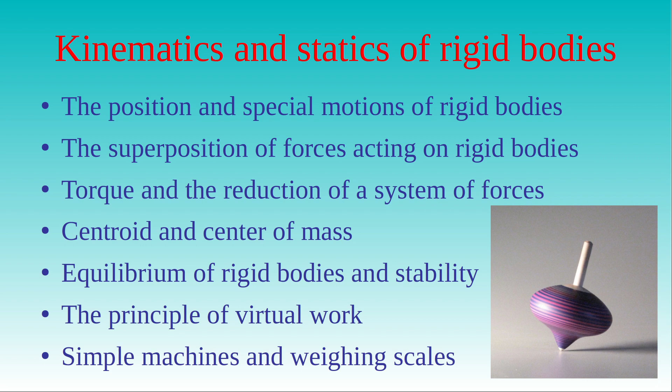We introduce the principle of virtual work as well and reformulate the criterion of equilibrium for rigid bodies with the help of this principle. Finally, we present simple machines and weighing scales operating on the principles related to the criterion of equilibrium for rigid bodies.

In order to start with the procedure to determine the position of a rigid body, we recall the concept of rigid body. When we presented the models used to describe bodies in mechanics, we defined rigid body as an idealized model where the points of the body cannot change their position with respect to each other.

The position of a body is always determined with respect to a frame of reference, for example the laboratory where we perform experiments with the body, and we describe its position in a coordinate system attached to the frame of reference. The position of a rigid body is completely determined in three-dimensional space by specifying the positions of three arbitrary points A, B, and C of the body,

provided they are not collinear, that is, these points are not lying on the same straight line.

For if we fix only the point A of the body, then the points B and C can be rotated over the spheres of radii given by the distances of the points B and C from the point A, with the center at the point A.

If the point B of the body is also fixed, then the point C can still be rotated about the axis passing through the points A and B.

If we fix the three points A, B, and C of the body, then we fix the position of the whole body, that is, we completely specify its position in space.

Since we use three non-collinear points and the position of a point is described by three coordinates in a coordinate system, we need 3 times 3, that is 9 data, to determine the position of a rigid body in the coordinate system attached to the frame of reference.

If we use a Cartesian coordinate system, then these data consist of the Cartesian coordinates x, y, and z of the points A, B and C.

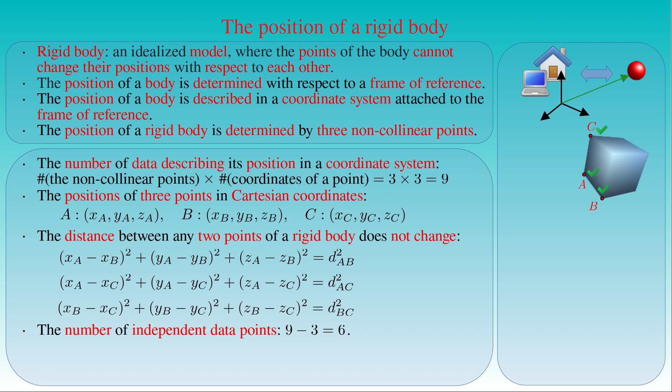Therefore, the instantaneous position of a rigid body performing an arbitrary motion is determined by 6 independent data. In other words, a freely moving rigid body has 6 degrees of freedom as opposed to a freely moving point mass, which has only 3 degrees of freedom.

We can choose the 3 coordinates of an arbitrary point of the body and 3 angles describing its orientation to specify the 6 independent data for a rigid body, where the angles are the so-called Euler angles.

In order to describe the position of a rigid body in the coordinate system with coordinates x, y, z and origin O, we attach another Cartesian coordinate system with coordinates x', y', z' and origin O' to the body. If the position and orientation of this coordinate system is known, then the position of the body is specified. Its position is given by the coordinates x null, y null and z null of the point O' in the coordinate system x, y, z.

We need 3 other data to determine the relative orientation of the two coordinate systems. The positions of the origins O and O' are indifferent, so we can translate the coordinate system x, y, z from point O to point O' without changing its orientation. Then the relative orientation of the two coordinate systems is determined as follows.

First we rotate the coordinate system counterclockwise about its z-axis by the angle psi. Then we rotate it counterclockwise about its x-axis by the angle theta. In the last step, we rotate it counterclockwise about its z'-axis by the angle phi, such that the y and z axes are brought into the y' and z' axes.

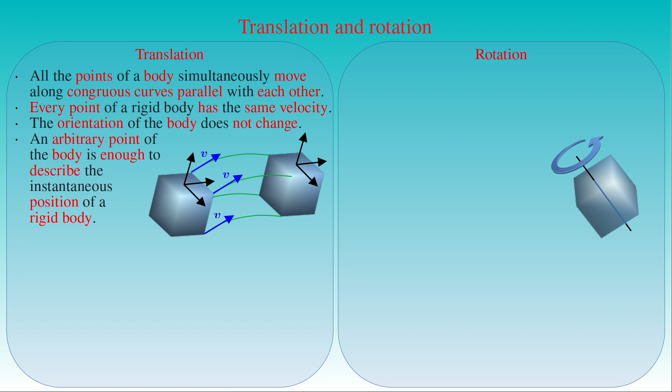Another important type of motion of a rigid body is rotation about an axis. When a rigid body rotates, its points lying on the rotation axis remain at rest, whereas the rest of its points move along arcs lying in planes perpendicular to the axis. In this case, we need not only an arbitrary point of the rigid body but also the orientation of a coordinate system attached to the body to describe its instantaneous position.

Now we can assume that the general motion of a rigid body is a composition of a series of infinitesimal translations and rotations of the body. We will illustrate this statement with a simple example.

Let the 3 points specifying the position of a rigid body be the 3 corner points A1, B1, and C1 of an equilateral triangle at the instant of time t1, and let this triangle have another position with corners at points A2, B2, and C2 at the instant of time t2. Here the letter D denotes the length of the sides of the equilateral triangle.

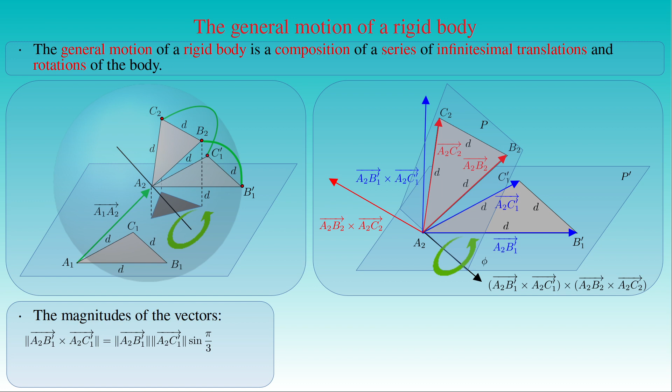Since the length of the sides of the triangle is given by d, the magnitude of the cross product equals d squared times the square root of 3 over 2. The magnitude of the cross product of the vectors pointing from corner A2 to the corners B2 and C2 is also given by d squared times the square root of 3 over 2, because the triangles are congruous.

This result helps us determine the rotation angle if we calculate the dot product of the normal vectors of the planes P and P', which can be written as the product of the magnitudes of the two normals times the cosine of the angle phi measured between them. By substituting the magnitudes of the two vectors into this equation, we obtain 3 over 4 times d to the 4th, times cosine phi. For given triangles, the coordinates of the points A2, B'1, C'1, B2 and C2 are known.

Then the cross product of the plane's normals can be computed from the coordinates of the points. Similarly, the scalar product of the plane's normals is determined by these coordinates. Since the length d is fixed for the triangles, we can express the cosine of the rotation angle as a function of the coordinates. We can also translate the triangle A1B1C1 along the vector pointing from point B1 to point B2.

This brings it to the position described by the triangle A'1B2C'1. Then we need to rotate the latter triangle about an axis passing through point B2 to bring it to the position of the triangle A2B2C2.

Although the translation vectors are different and the rotation axis passes through different corners of the triangles in the two cases, both axes have the same direction and both rotation angles are the same.

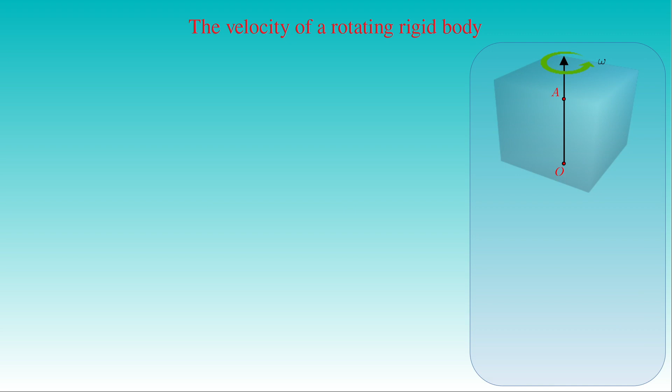After having defined the angular velocity of a rotating rigid body, we show how to interpret this kinematic quantity as a vector. Let us consider a rigid body rotating about a fixed axis passing through the points O and A with angular velocity omega. An arbitrary point P of the rotating body, described by the position vector r, has a circular trajectory around the axis, and we can apply the formula obtained for circular motion, stating that the magnitude of the velocity v of point P is given by its distance ρ from the axis, times the angular velocity omega.

If the angle between the rotation axis and the position vector r is denoted by theta, then the distance ρ can be written as the length of the vector r times sine theta, and the speed of the point P is equal to omega times r times sine theta. The right-hand side of this equation reminds us of the magnitude of the cross product of two vectors, given by the product of their magnitudes times the sine of the angle between them. As a result, we can consider the angular velocity omega as a vector lying on the rotation axis, with its tail at the point O and with an orientation determined by the right-hand rule.

By applying the notations of the figure, we can write this vector as omega times a unit vector pointing upward, where the unit vector is expressed as the vector pointing from point O to point A divided by its length. If we hold the axis with our right hand and rotate the fingers in the direction of motion of the rotating body, then our thumb points the direction of the angular velocity.

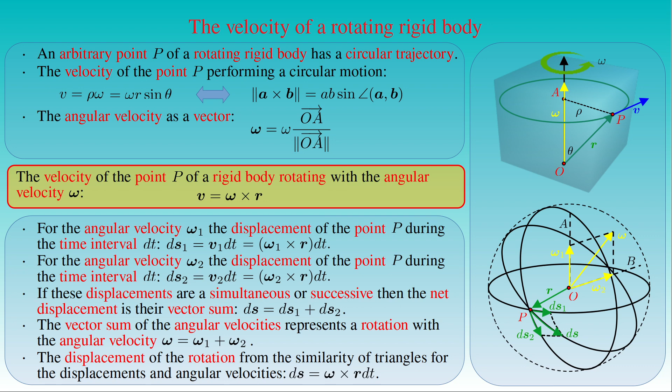We can go even further in the interpretation of a rotation as a vector. Since the angular velocity omega of an infinitesimal rotation is a vector, its product with the infinitesimal interval of time dt is also a vector, and it can be interpreted as the infinitesimal rotation vector d phi.

The infinitesimal change dr in the position vector r of a given point P of the rotating body is always perpendicular to both the axis of rotation, that is the vector d phi, and the instantaneous position vector r. As a result, the infinitesimal displacement of point P can be written as the cross product of the infinitesimal rotation vector d phi and the position vector r.

However, small but finite rotations cannot be considered as vectors because the parallelogram rule does not hold for them and the finite rotations are not commutative.

For example, let us consider a cuboid in a Cartesian coordinate system. We can rotate the cuboid first about the x-axis by 90 degrees, and then about the y-axis by 90 degrees. But we can change the order of rotations and rotate it first about the y-axis by 90 degrees, and then about the x-axis by 90 degrees. As a result, the cuboid has different positions and orientations after the composition of rotations in the two cases.

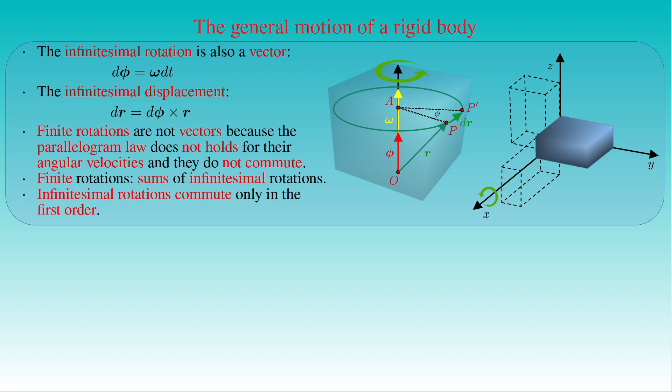If any finite rotation can be constructed by the sum of infinitesimal rotations, how can finite rotations be non-commutative and the infinitesimal ones not? In fact, infinitesimal rotations commute only in the first order, as we approximated the infinitesimal displacements along the circular path of the rotation with displacement vectors in the first order.

If we study the general motion of a rigid body, we can choose the reference point O attached to the frame of reference and another reference point O' attached to the moving body given by the instantaneous translation vector R0. Then any point P of the body can be described by the position vector R pointing from point O to point P, and the relative position vector R minus R0 pointing from point O' to point P.

We already saw that the instantaneous velocity v of an arbitrary point P of a rigid body performing a general motion can be combined from the translation and the rotation about the axis passing through the point O'. The translation velocity v0 of the body is given by the derivative of the translation vector R0 with respect to the time t. The origin O' was chosen such that the instantaneous axis of rotation with the angular velocity omega passes through it. Then the velocity v of the point P is given by its translation velocity v0, plus the cross product of the angular velocity omega of the rotation and the relative position vector R minus R0.

Now we present the special cases of rigid body motion in terms of kinematics based on the degrees of freedom of the moving body. In the beginning of the study on the kinematics of rigid bodies, we introduced the degrees of freedom of their motion as the number of independent variables that determine the instantaneous position of a rigid body in space. Based on this concept, we can divide rigid motion into two general groups.

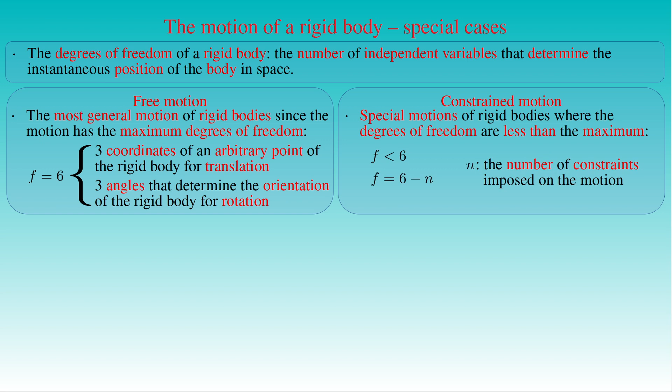We already studied constrained motion in the case of a point mass, and this concept can also be applied for a rigid body, where constraints are imposed either on its motion or its position, or on both, limiting its motion and position. For the rigid motion described in a coordinate system, constraints are given by the equations of geometric elements representing some restriction in the motion of the body. Such geometric elements can be some set of fixed points of the rigid body, curves, or surfaces.

For example, a set of fixed points can determine one or more fixed points of a body or even a rotation axis passing through the body, along which the points of the body do not change their position during its rotation. Similarly, if a ball is attached to a string and whirled in a circle by hand, then the motion of the ball is constrained such that the curve describing its trajectory in space is a circle. In the third example, the ball rolls on a curved surface of a ramp preventing it from free fall, and the surface represents a constraint on the motion of the ball.

These examples demonstrate that the points of the rigid bodies have no instantaneous displacements perpendicular to the curve or the surface representing the constraint. The ball whirled in a circle has no motion in the radial direction of its circular path, and the ball rolling on the curved surface had no instantaneous displacement in the direction of the surface normal.

We can talk about several types of the constrained motion of rigid bodies depending on the number of constraints imposed on the motion. The first type of constrained motion is the motion of a rigid body on a surface, for example the motion of a wheel or a ball across a floor or a table. Here the degrees of freedom f of the moving body is equal to 5 since the translation perpendicular to the surface is forbidden during the motion. Such a motion has different cases.

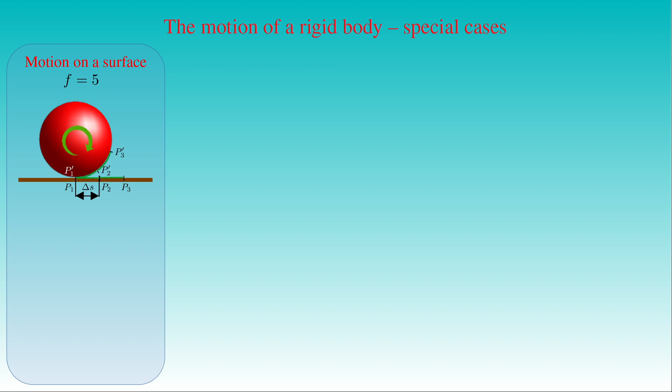If we mark the instantaneous contact points of a moving ball across a table on both the ball and the surface of the table at given intervals of time, then the curve connected with the points P1, P2, P3 etc. on the surface, and the curve connected with the points P1', P2', P3' etc. on the ball can describe the motion of the center of the ball. If the arc lengths delta s measured between the corresponding adjacent points of the two curves are equal, that is the length of the section P1 P2 is equal to the length of the arc P1' P2', the length of the section P2 P3 is equal to the length of the arc P2' P3', and so on, then the ball rolls on the planar surface like a billiard ball moving across the table when it is hit with a cue stick.

Otherwise we talk about rolling-sliding motion instead of pure rolling, which can also be demonstrated with a billiard ball hit below its center. The ball performs pure sliding if the locations of points P1, P2, P3, etc. on the ball remain the same, as in the case of a bumper ball which can also slide across ice.

If the position of the contact point remains the same on both the rigid body and the surface, and the body rotates about an axis perpendicular to the surface and passing through the contact point, then the motion is called spinning or drilling. As an example, we can consider a marble spinning on a surface, or a more illustrative one of a basketball spinning on one finger.

Another type of constrained motion is called spherical motion, where the rigid body is fixed at a point O such that it can rotate about this point, while any other point P of the body can move over a spherical surface with center O.

This type of motion can be considered as a series of infinitesimal rotations about instantaneous axes of rotation passing through the point O. As a result, the motion has only 3 rotational degrees of freedom, given either by the Euler angles, or more generally by 2 angles describing the direction of the instantaneous rotation axis and a third angle measuring the rotation of the body about this axis.

A typical example of spherical motion is the swinging of a spherical pendulum, where the deepest points of the tracks drawn in the sand by the tip of the moving bob have a constant distance from the suspension point O of the pendulum, that is, they run over a sphere with center O.

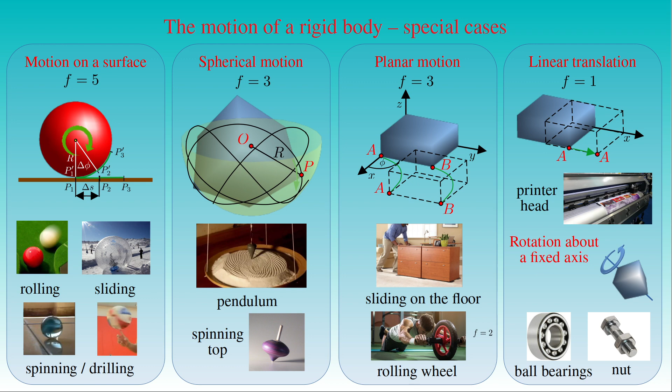In the discussion on rigid body kinematics, we demonstrated that the motion of a rigid body can be interpreted as a composition of translations and rotations. Now we examine how to describe these two types of special motions in coordinate representation.

As already seen, we talk about translation if all the points of a rigid body simultaneously move along congruous curves parallel with each other. These curves are arbitrary curves in space, but in the case of linear translation they consist of straight line segments.

Linear translation is an important special case since it is often used to study the relations between different frames of reference. The distance and the direction of a translation are determined by the length and the direction of the translation vector. If an arbitrary point P of a rigid body is described by the position vector r with respect to some reference point O, then the position vector r' of the point P after the translation of the body is given by the vector sum of the position vector r and the translation vector delta r.

In order to give the coordinate representation of translation, we can attach the origin of a Cartesian coordinate system to the reference point O and describe the position vectors r and r' with its x, y, and z components. Similarly, the Cartesian components of the translation vector can be written as delta x, delta y and delta z.

These coordinates represent the three translation degrees of freedom of rigid bodies translated in space, and we can consider translation as a point transformation of three parameters.

Then the vector equation of translation represented in Cartesian coordinates states that the components x', y', and z' describing the position of the point P after translation are equal to the coordinates x, y, and z of the vector r describing its original position, plus the coordinates delta x, delta y, and delta z of the translation vector.

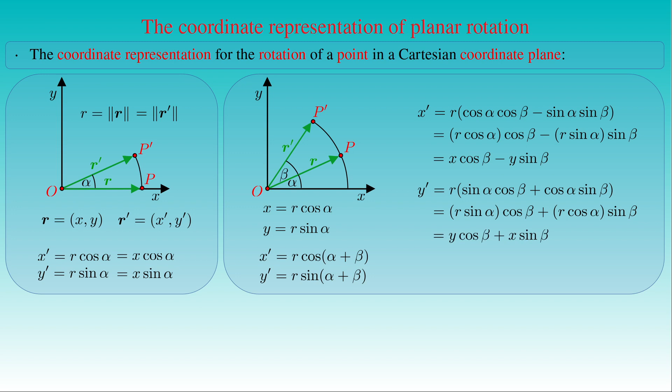As a result, the coordinates x' and y' of the point P' rotated about the origin through the angle beta in the xy plane are given by the following equations. X' is equal to the x-coordinate of the point in its initial position times the cosine of the rotation angle beta, minus the y-coordinate of the point in its initial position times sine beta. y' is given by the y-coordinate times the cosine of the angle beta, plus the x-coordinate times the sine of the angle beta. We can also write these two equations in vector notation.

The column vector on the left-hand side describes the coordinates of the point P', and the right-hand side is the product of a 2 times 2 matrix and the column vector describing the coordinates of the point P. Here the matrix with the elements cosine beta, minus sine beta, sine beta and cosine beta is the coordinate representation of the rotation of a point about the origin O through the angle beta in the xy plane, which is also called the rotation matrix of the planar rotation.

We can generalize planar rotations about the origin of a Cartesian coordinate system to spatial rotations about one of the coordinate axes, and determine their coordinate representation by using the one derived for planar rotations. The straightforward generalization of the rotation of a point in the xy plane is the rotation of the point P about the z-axis in a plane parallel with the xy plane. The distance of the plane of rotation from the xy plane is given by the coordinate z at the point O, where the z-axis passes through the plane of rotation.

The coordinates of the position vector pointing from the point O to the point P are the coordinates x, y and z, where the coordinates of the position vector r' pointing from the point O to the point P' are described by the primed Cartesian coordinates. Here the angle alpha is measured between the xz plane and the position vector r, and beta is the angle of rotation measured between the position vectors r and r'.

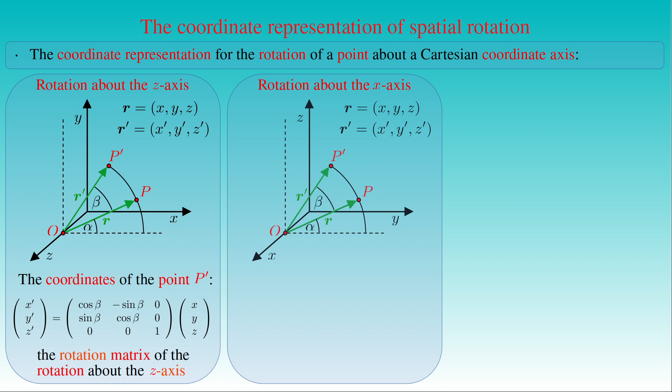For rotations about the x-axis we can choose any plane of rotation parallel with the yz plane. Here the plane of rotation passes through the x-axis at the point O, and the position vectors r and r', pointing from O to the points P and P', are parallel with the yz plane. The coordinates x', y', z' of point P' are expressed as the product of a 3 times 3 matrix and the column vector of the coordinates x, y, z.

The matrix of the planar rotation in the yz plane forms the second and third rows and columns of the matrix, where the first row and column are constructed such that the multiplication gives the primed coordinates where x' is equal to x. This matrix is the rotation matrix for the rotation of a point about the x-axis through the angle beta.

Similarly, we can determine the coordinate representation of rotations about the y-axis by choosing any plane of rotation parallel with the zx plane. In this case the plane of rotation passes through the y-axis at the point O, and the position vectors r and r', pointing from O to the points P and P', are parallel with the zx plane. The column vector of coordinates of point P' is given by the product of a 3 times 3 matrix and the column vector of coordinates of point P.

Here the second row and column of the matrix vanish except the diagonal element, which is 1. The rest of the elements in the corners of the matrix are constructed from the matrix of the planar rotation in the zx plane through the angle beta. Since the direction of rotation is opposite to that of the first two cases, the rotation angle beta has a negative sign, which changes the sign of sine beta since it is an odd function. The resulting 3 times 3 matrix is the rotation matrix for rotation about the y-axis through the angle beta.

Then we have 3 matrices providing the coordinate representation of spatial rotations about the 3 Cartesian coordinate axes. The matrix R(x-hat, alpha) represents the rotation of an arbitrary point about the x-axis through the angle alpha, where the bold-faced x-hat denotes the unit vector pointing from the origin in the direction of the x-axis. Similarly, the matrices R(y-hat, alpha) and R(z-hat, alpha) represent the rotations about the y and z axes respectively, where y-hat and z-hat are unit vectors pointing in the direction of the y and z axes, and alpha is the angle of rotation.

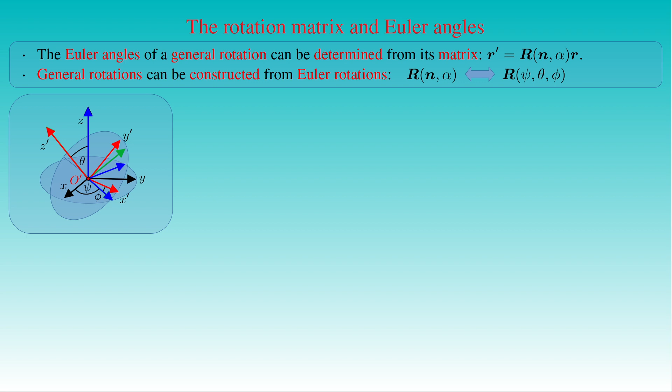Since the Euler rotation is the composition of the three rotations of the Cartesian coordinate axes, the rotation matrix R expressed in terms of the Euler angles psi, theta, and phi can be written as the product of the rotation matrices R z-hat-prime phi, R x-hat theta, and R z-hat psi.

In order to compute the product of the three matrices, we start with the multiplication of the second and the third matrices in the product. We write the elements of the third matrix, that is the matrix R z-hat psi, in a table, and the elements of the second matrix, that is the matrix R x-hat, in another table such that their mutual positions determine the result of their multiplication.

This arrangement facilitates the computation of any element in a given row and a given column of the product matrix, obtained from the dot product of the corresponding row of the second matrix and the corresponding column of the third matrix. The product of the first row of the second matrix and the first column of the third matrix gives the top left element of the resulting matrix, which is equal to cosine psi.

The product of the first row of the second matrix and the second column of the third matrix is equal to minus sine psi for the top middle element of the resulting matrix. The product of the first row of the second matrix and the third column of the third matrix gives the vanishing top right element of the resulting matrix.

Similarly, the product of the second row of the second matrix and the first column of the third matrix gives the middle left element of the resulting matrix, which is equal to cosine theta times sine psi. The product of the second row of the second matrix and the second column of the third matrix is equal to cosine theta times cosine psi for the element in the center of the resulting matrix.

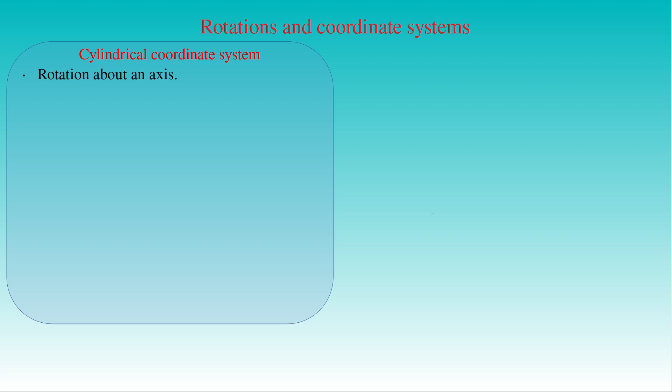We can study the motion of a rotating rigid body in a cylindrical coordinate system if the body rotates about a fixed axis. Any two fixed points of a rigid body determine an axis about which the body can rotate, for example a bicycle wheel attached to its axle.

In other cases, rigid bodies can rotate over some constrained surface, like a toy train moving on a circular track, or a ball bearing where one of the races is fixed while the other one is allowed to rotate by the separated balls between the races.

The description of such a motion becomes very simple in a cylindrical coordinate system with its origin on the axis, while its z-axis points in the direction of the rotation axis of the body. Any point P of the rotating body can be described by the position vector r with the coordinates rho, phi and z.

Since the coordinate ρ is the distance of the point from the axis of rotation, it is invariant under the rotation of the body. Similarly, the points of the body do not move along the z-axis, and the z-coordinate of their rotating position vector remains constant. If r' denotes the position vector of the point P' after rotation, the components ρ', phi' and z' of r' are equal to ρ, phi plus delta phi, and z respectively. Here delta phi gives the change in the azimuthal angle of the rotating point.

As a result, the azimuthal angle completely describes the motion of the rigid body during its rotation, which simplifies the analysis of the problem. A spherical coordinate system can be used to describe rotating motion as well.

If we fix only one point of the rigid body, then it can rotate about the fixed point in an arbitrary direction. As a result, all the points of the body rotate over spheres of radii given by the distances of the points from the fixed point, that is from the center of rotation. Typical examples of such spherical rotation are a spinning top with its tip constrained to a cup while its top end slowly revolves about the tip, and a spherical pendulum swinging on the surface of a sphere.

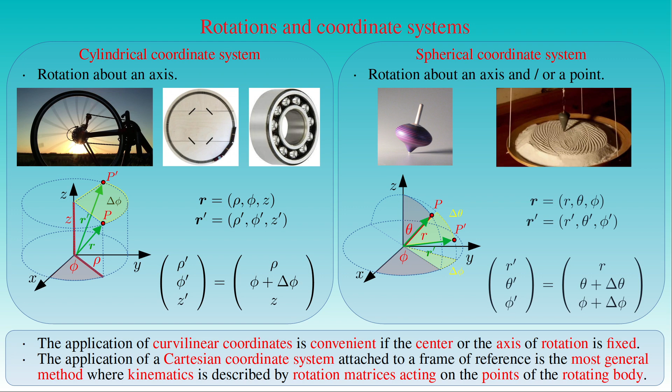In the context of the coordinate representation of rotations, we need to mention another type of point transformation: reflection. At first sight, reflections of geometric points in space do not seem to have anything to do with the physical motion of rigid bodies, but this geometric transformation has an important role in the classification of rotations.

When we talk about the reflection of a rigid body in space, we imagine an arbitrary plane in the vicinity of the body serving as a plane of reflection. The image of the body appears on the opposite side of the plane, and it has the same distance from the plane of reflection as the rigid body.

If the images of the points A, B, C and D of the body are denoted by the primed letters, then the distance d sub AO is equal to the distance d sub A'O. That is, the intersection point O of the section AA' and the plane of reflection is the midpoint of the section AA'. Similar equations can also be given for the points B, C, D and for other arbitrary points of the rigid body with the corresponding points of intersection.

We can also see that although the shape of the image remains congruent to the original, it has a reverse orientation. That is, the image flips left to right: if the original points A and B are in the front, then the reflected points A' and B' are in the front as well.

We can obtain the coordinate representation of the reflection if we attach a Cartesian coordinate system to the plane of reflection such that one of its coordinate planes, for example the YZ plane, is in the plane of reflection.

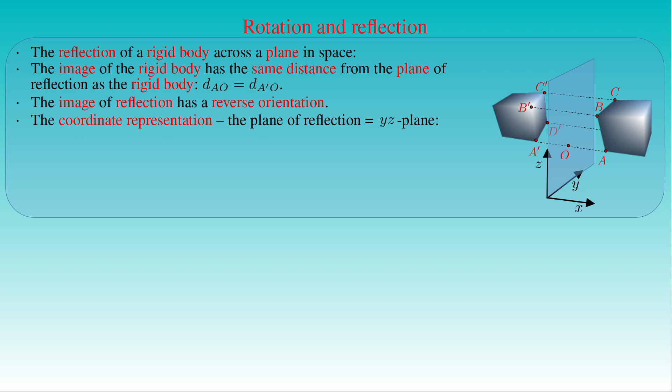If any point of the rigid body has the x, y and z coordinates in this coordinate system and its image has the primed Cartesian coordinates, then the distance equation of the original points and their images has the coordinate representation stating that the coordinates x', y' and z' of the image are equal to -x, y and z, respectively.

The right-hand side can be written as the product of a 3x3 diagonal matrix and the column vector x, y and z, where the non-zero components in the diagonal are -1, 1 and 1. This matrix is the coordinate representation of the reflection across the YZ coordinate plane, and it is denoted by P sub x hat, where the unit vector x hat is the normal to the plane of reflection.

We can derive the reflection matrices for the other two coordinate planes as well, where all the Cartesian reflection matrices P sub x hat, P sub y hat and P sub z hat are diagonal matrices, with the diagonals 1, -1, 1 for P sub y hat, and 1, 1, -1 for P sub z hat.

If the normal to the plane of reflection has an arbitrary direction, we can rotate the plane together with the body into any of the coordinate planes, perform the reflection of the body, and apply an inverse rotation on the image. We have already shown that rotations can be represented by orthogonal matrices, which are denoted by the capital letter O.

In other words, the square of the determinant of a general rotation matrix is equal to 1. As a result, the determinant is equal to either +1 or -1. If the determinant of a matrix is equal to 1, we call it a special orthogonal matrix, denoted by the capital letters SO, and such matrices represent the proper rotations of rigid bodies in space.

If the determinant of a matrix is equal to -1, then it can be written as the product of a special orthogonal matrix and a reflection matrix. In other words, it is a composition of a proper rotation and a reflection in space. Such operations are also known as improper rotations.

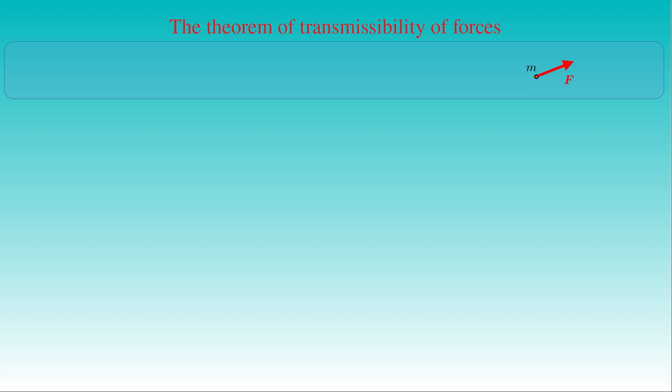In the case of a rigid body, this information is not unique due to the size and extension of the body. In order to give a complete description of the effect changing its state of motion, we need to specify both the point P of the application of the force F, that is the point of the body where the force is applied, and the line of action of the force, that is the line along which the force acts.

A system of forces simultaneously acting on a point mass can be replaced with the vector sum of the system. If the net force given by the vector sum is zero, that is the forces acting on the point mass are balanced, then they do not have an effect on the state of motion of the point mass.

In the case of rigid bodies, which are not point-like objects, the superposition and the balance of forces are more complicated problems, since the points of application of the individual forces are generally different. For example, let us place a board on 3 balls of the same size such that the balls rolling on the floor allow the board to move horizontally.

If a pair of forces F and minus F, that is 2 forces of the same magnitude but opposite in direction, are applied on the board at points P1 and P2, then the board either rotates about some vertical axis even if the net force acting on it vanishes, or stays at rest.

The result is due to the fact that the lines of action of the forces are different in the first case and coincident in the second. The findings can be formulated as follows: a rigid body under the influence of a pair of forces with the same magnitude but opposite direction is in equilibrium if the lines of action of the forces are coincident. Then the pair of forces has no net effect on the body.

Suppose the force F is applied on the body at point P1. We can also apply the pair of forces F and minus F at any point P2 on the line of action of the force F exerted at point P1. Based on our statement, the force F applied at P1 and the force minus F applied at P2 do not have any net effect on the body, and they can be neglected.

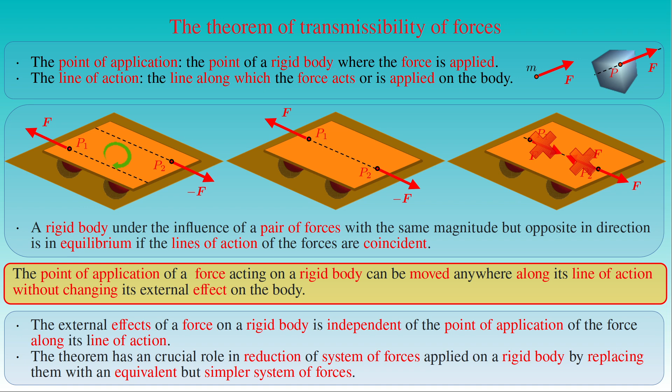First, we consider the superposition of non-parallel planar forces, that is, forces with intersecting lines of action lying in one plane. Suppose P1 and P2 are the points of application of the forces F1 and F2 acting on a rigid body. We translate the forces F1 and F2 to the point of intersection A of their lines of action, and determine their net force F by using the parallelogram law. Obviously, the point of application of the force F is arbitrary along its line of action.

We can repeat the same procedure for the force reduction if we add another force to the system of forces acting on the rigid body.

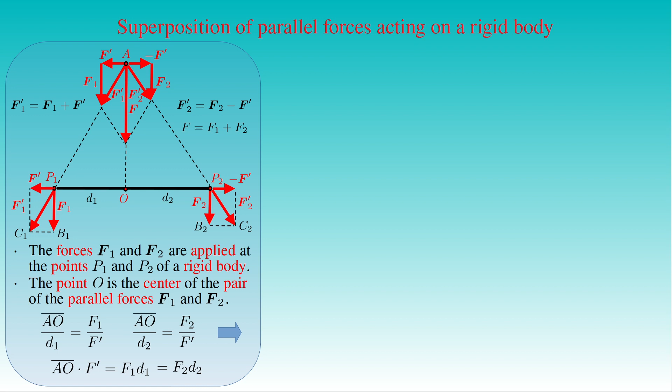We can generalize this result by translating one of the points of application of the forces F1 and F2, and conclude that the parallel forces F1 and F2 of the same orientation, applied at the points P1 and P2 of a rigid body, can be replaced by a net force F, which is parallel with the given forces and its magnitude is equal to the sum of the magnitudes of these forces.

The line of action of the force F is determined by the position of the point O, where the length L1 of the section P1O divided by the length L2 of the section P2O is equal to the distance d1 over the distance d2. These two ratios are equal to the magnitude of the force F2 over the magnitude of the force F1, which can be written as the equation stating that F1 times d1 is equal to F2 times d2.

The whole system is in balance if we suspend a weight G from the rod at the point O, where the magnitude of the weight G is given by the sum of the magnitudes of the forces F1 and F2. The forces F1 and F2 can therefore be replaced by the force F applied at the point O.

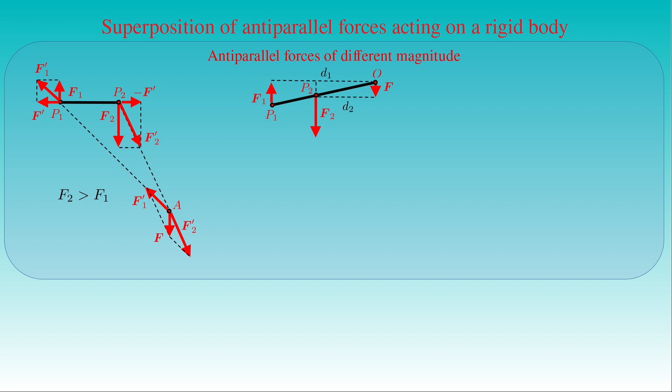As in the previous example, we can translate the force F along its line of action and conclude that the magnitude of the net force F of the forces F1 and F2 is given by the difference between their magnitudes, and its line of action is determined by the equation stating that the magnitude of the force F1 times the horizontal distance d1 between the point P1 and the point O, is equal to the magnitude of the force F2 times the horizontal distance d2 between the point P2 and the point O.

The force F replacing the antiparallel forces F1 and F2 points in the same direction as the force F2, since the force F2 has greater magnitude than the force F1, and the point P2 is located between the points P1 and O. In order to demonstrate this result, we can apply the same apparatus as used in the previous problem.

The rope on the right-hand side exerts the force F1 upon the rod at the point P1, which is still one of the antiparallel forces, whereas the weight G acting on the point O represents the other one of the antiparallel forces. The net force of the antiparallel forces is a force that has the magnitude G minus the magnitude of F1, and it is applied at the point P2 and points downward, cancelling the force F2.

The equation stating that the magnitude of F2 is equal to the magnitude of G minus the magnitude of F1 has the following numerical form: 2 units of weight is equal to 5 units of weight minus 3 units of weight.

For the equation stating that F1 times D1 is equal to F2 times D2, we can write that 3 units of weight times 10 units of length is equal to 5 units of weight times 6 units of length.

Now we consider antiparallel forces of the same magnitude. If the lines of action of the forces are not coincident, then we cannot use the procedure presented here, because the lines of action constructed by applying the auxiliary forces have no intersection.

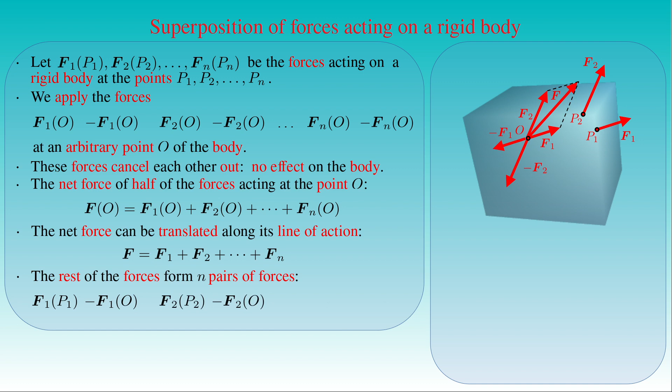Then we determine the net force Fo of the forces F1O, F2O, ellipsis, FnO, which is applied at the point O. The net force F can be translated along its line of action and we write it without specifying the point of application. The rest of the forces forms the pairs of forces F1P1 minus F1O, F2P2 minus F2O, ellipsis, FnPn minus FnO.

As a result, we replace the system of forces acting on the body with a single force and n pairs of forces. This procedure does not simplify the system of forces applied on a rigid body, but we will prove that the pairs of forces acting on the body can be reduced to a single pair of forces, and in turn, a general system of forces can be reduced to a single force and a single pair of forces.

Now we introduce a new quantity called torque acting on a rigid body about an axis. Let us consider a rigid body rotating about a fixed axis as seen in the figure. For a vertical axis of rotation, we can neglect the effects of the weight of the body on its motion.

As everyday experience shows, we can change the state of motion of such a body, for example when we open or close a door, by applying a force on it provided the line of action of the force is not parallel with the axis of rotation.

In other words, if an arbitrary force F' is exerted upon a rigid body rotating about a fixed axis, only its component F lying in the plane perpendicular to the axis of rotation can have an effect on the rotation of the body. Then we can examine a force F acting on a body with the line of action in the plane perpendicular to the axis of rotation passing through the plane at the point O.

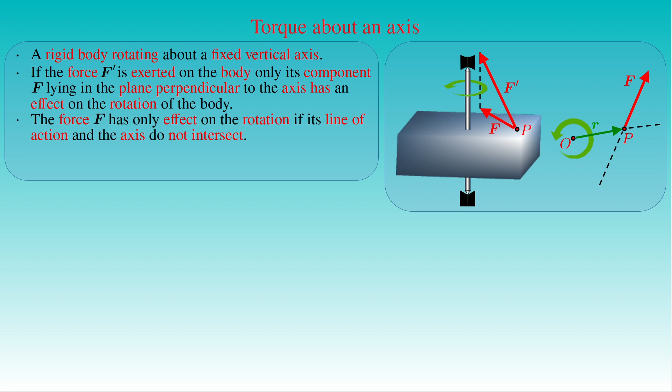Everyday experience also shows that the force F can only have an effect on the rigid rotation if its line of action and the axis of rotation do not intersect, that is the distance d between the point O and the line of action of the force does not vanish.

The perpendicular distance d from the axis to the line of action of the force F is called the lever arm of the force F about the axis of rotation.

We define the torque tau of the force F acting in the plane perpendicular to the axis of rotation by the magnitude of the force F times the lever arm d of the force. By convention, counterclockwise torques are positive and clockwise torques are negative.

The unit of torque is given by the unit of force times the unit of length, which is the same as the unit of work, that is the unit of mass m times the unit of length L times the unit of time t to the minus 2, times the unit of length L. The SI unit of torque is therefore equal to Newton meter.

If the force F is applied at angles below the critical angle, then the spool will roll towards the person pulling the thread. If the force F is applied at angles above the critical angle, then the spool will roll away from the person pulling the thread.

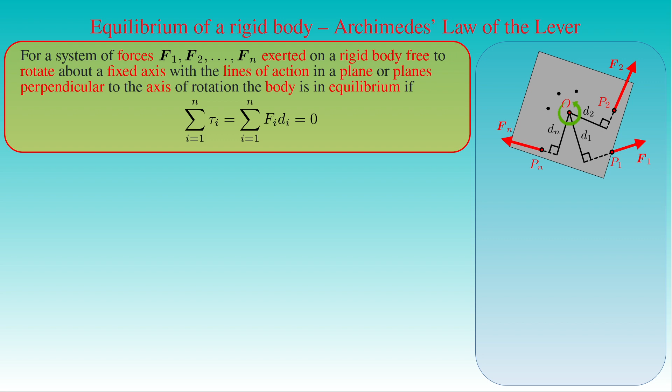In the figure, point O denotes the intersection of the axis and the plane or planes of the lines of action, and D1, D2, ..., Dn are the lever arms of the corresponding forces about the axis of rotation. The rigid body under the influence of these forces is in equilibrium if the algebraic sum of the torques τ1, τ2, ..., τn of the forces F1, F2, ..., Fn about the rotation axis vanishes. Each torque τ is given by the magnitude of the force Fi times the lever arm di of the force Fi. Archimedes' law of the lever is just a special case of this condition for n equal to 2,

stating that the weights suspended from a lever are in balance at distances inversely proportional to their magnitudes. If the force F1 represents the weight suspended from the left arm of the lever at distance d1 measured from the pivot of the lever, or its fulcrum, and F2 is the weight suspended from the right arm of the lever at distance d2 from the fulcrum, then we can write that the magnitude of force F1 times the lever arm d1, minus the magnitude of force F2 times the lever arm d2, vanishes. The second term in the sum is negative since the force F2 produces a clockwise torque on the lever.

This formula is equivalent to the equation stating that F1 times d1 is equal to F2 times d2, which can be demonstrated with the setup shown in the figure. That is, 2 units of weight times 6 units of length is equal to 3 units of weight times 4 units of length.

This law immediately follows from the result already obtained in the discussion on the superposition of forces acting on rigid bodies, because the forces F1 and F2 can be replaced by the force F with a line of action passing through point O. Since its line of action has an intersection with the axis of rotation, the net force F cannot produce rotation.

Another important application of the concept of torque is related to the work done in the case of rigid rotation. If a rigid body turns through a small angle δφ about the axis passing through point O under the influence of force F applied on the body at point P, then point P has a small displacement δs given by r times δφ, where r is the distance between points O and P.

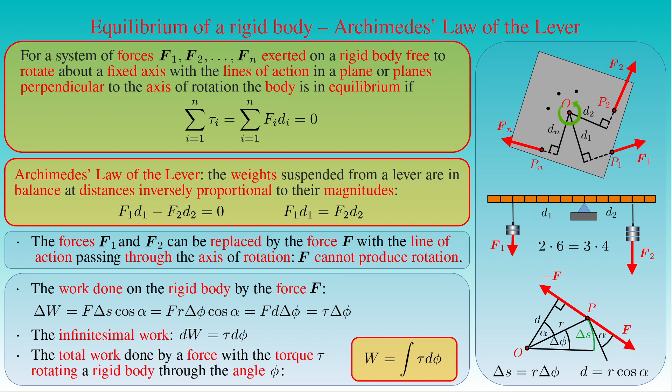Now we generalize the concept of torque about a point and interpret it as a vector quantity. Let us suppose that a rigid body is free to rotate about the point O, and the force F is applied on the body at the point P.

If theta denotes the angle between the direction of the position vector r of the point P with respect to the point O and the line of action of the force F, then the lever arm d of the force F about the point O can be written as the length of the position vector r times sine theta.

By definition, the torque tau of the force F about the instantaneous axis of rotation passing through the point O is given by the magnitude of the force F times the lever arm d of the force, which is equal to r times F times sine theta.

If we interpret the right-hand side as the magnitude of a cross product, namely the cross product of the position vector r and the force F, then we can generalize the concept of torque as follows.

The torque tau of the force F applied at the point P about the point O is defined by the cross product of the position vector r of the point P with respect to the point O and the force F. Since the cross product of two vectors also gives a vector, torque is defined as a vector.

Its direction is perpendicular to the plane spanned by the vectors r and F, and its orientation is determined by the right-hand rule. The unit of torque is the unit of length times the unit of force, as stated in the definition of the scalar-valued torque.

That is the unit of mass m times the unit of length L times the unit of time t to minus 2, times the unit of length L, which has the SI unit of Newton meter.

We can attach a Cartesian coordinate system to the center of rotation O where the instantaneous axis of rotation is the z-axis. Then we can write the x component of the torque tau about the center of rotation as the y coordinate of the point of application P times the z component of the force F applied at the point P, minus the z coordinate of the point P times the y component of the force F.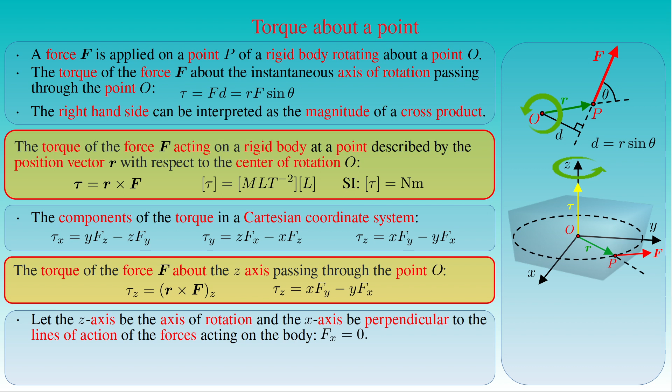For the z-axis as the axis of rotation and the x-axis perpendicular to the line of action of the force, the x component of the force F vanishes. As a result, the formula describing the z component of the torque reduces to the product of the x coordinate of the point of application P and the y component of the force F.

For example, let us apply the forces F1 and F2 at the points P1 and P2 such that their lines of action are perpendicular to the x-axis. Then the z component of the torque tau1 of the force F1 is given by the coordinate x1 of the point P1 times the y component of the force F1.

Since x1 is equal to minus the lever arm d1, and F1 sub y is equal to minus the magnitude of F1, we obtain F1 times d1, which is positive, indicating a counterclockwise rotation.

The z component of the torque tau2 of the force F2 is given by the coordinate x2 of the point P2 times the y component of the force F2. Here x2 is equal to the lever arm d2, and F2 sub y is equal to minus the magnitude of the force F2.

Tau z can be written as minus F2 times d2, which is negative, indicating a clockwise rotation. We also note that neither the z component of the force, nor the z coordinate of the point of application, appear in the expression describing the z component of the torque tau. This involves the fact that neither the component of a force parallel with the axis of rotation, nor the coordinate of the point of application specifying its position along the axis, have a role in the rotation about the axis.

By applying the general definition of torque, we can formulate the condition of equilibrium for a rigid body free to rotate about a single fixed point.

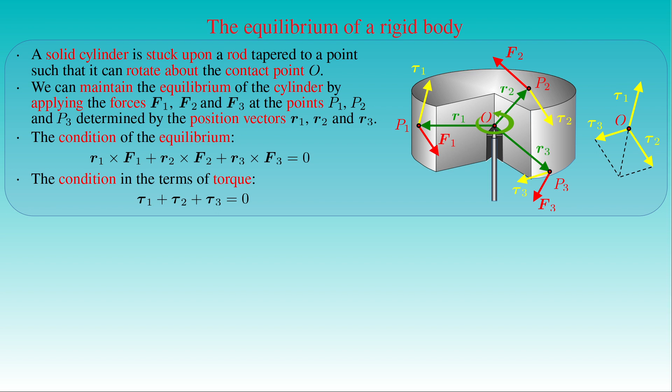The general formulation of this condition, which can also be demonstrated experimentally for a finite number of forces, is the following: for a system of forces F1, F2, ellipsis, Fn applied on a rigid body free to rotate about a pivot point O, the body is in equilibrium if the vector sum of the torques tau1, tau2, ellipsis, tau n about the pivot point O vanishes.

Here the torque tau i, for all i from 1 to n, is equal to the cross product of the position vector Ri of the point Pi with respect to the pivot point O, and the force Fi applied at the point Pi. In this condition, the reference point O is the pivot point, that is a fixed point of the rigid body around which the body is free to rotate.

However, we can also choose an arbitrary reference point O' in the body, and write the torque tau i in terms of the position vector R'i with respect to the new reference point, for all i from 1 to n. Then we can write the vector sum in the condition as the sum of the cross products of the position vectors R'i and the forces Fi from i equals 1 to n, where each vector R'i can be written as the vector sum of the vector R0 and the original position vector Ri.

Since the vector R0 does not depend on the index i, it can be factored out in the first sum. Then we obtain the cross product of the vector R0 and the net force F acting on the body, defined by the vector sum of the forces Fi for all i from 1 to n. This result shows that the net torque on a rigid body by a system of forces is independent of the reference point only if those forces result in zero net force.

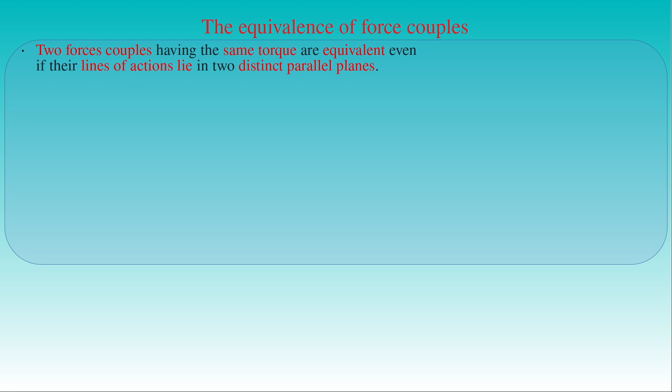As we can see, two sets of weights are used in the series of weights G1, G2 and G3: light ones and heavy ones. The light weights are only applied to achieve complete balance of the net forces exerted on the beam, and their contribution to the effect of the heavy weights is negligible.

In this setup, two force couples are exerted on the beam: the force couple F1 and -F1, and the force couple F2 and -F2. Since the beam is in equilibrium under the influence of the two force couples and the net force of the force couples vanishes, the net torque rotating the beam must vanish as well.

By definition, the torque τ1 is perpendicular to the plane P1 spanned by the force couple F1 and -F1, and its orientation is given by the right-hand rule, producing a clockwise rotation.

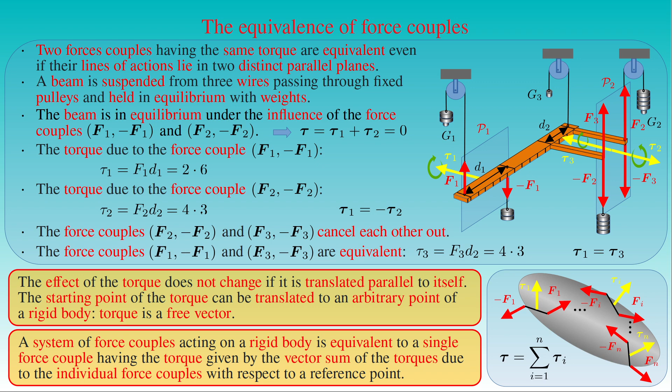We can apply this theorem to another one on the reduction of a general system of forces. When we studied the superposition of forces applied on a rigid body, we demonstrated that a system of n forces acting on the body can be replaced with a single resultant force and n pairs of forces, or force couples.

Now the theorem formulated here states that these n force couples Fi, applied at point Pi, and -Fi, applied at a reference point O, for i from 1 to n, are equivalent to a single force couple having the torque τ given by the vector sum of the torques of the individual force couples.

Then we can state the following theorem: the system of forces F1, F2, ellipsis, Fn acting on a rigid body is equivalent to the net resultant force F and a force couple producing the torque tau. Here the resultant force F is given by the vector sum of the forces Fi from i equals 1 to n, and it can be applied at an arbitrary point O of the body.

The torque tau due to the force couple is equal to the sum of the cross product of the vector Ri and the force Fi from i equals 1 to n. In the vector products, Ri is the position vector of the point of application Pi of the force Fi with respect to the point O.

We note that the resultant force F and the torque tau can be combined into a pair of vectors called a wrench, forming a six-dimensional vector used in screw theory, a mathematical formulation of forces and torques acting on rigid bodies. Then the theorem states that a system of forces acting on a rigid body can be replaced by a wrench.

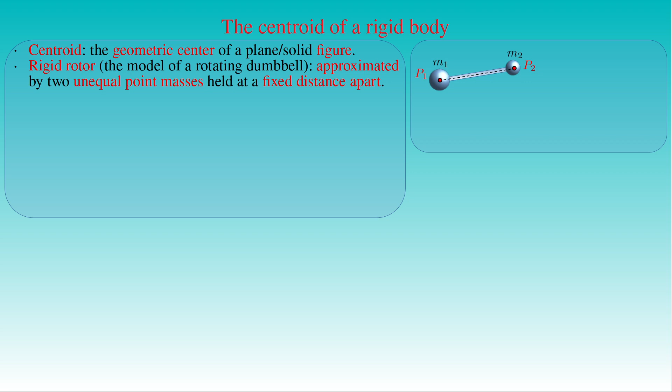First, let us consider the simplest idealized rigid system, the rigid rotor. It is the model of a rotating dumbbell that consists of two solid spheres connected with a rigid stick holding them a fixed distance apart. We approximate the spheres by the point masses m1 and m2 at their centers p1 and p2, and assume that the mass of the stick is negligible.

The gravitational forces acting on this system are given by the weights G1 and G2 of the two point masses, which are equal to the mass m1 times the gravitational acceleration g and the mass m2 times the acceleration vector g, respectively. The weights G1 and G2 point downward towards the center of Earth, but the lines of action of the two forces can be considered parallel over a short distance determined by the size of the rigid rotor.

We have already shown that these parallel planar forces can be replaced by their resultant force, capital G, that is the vector sum of G1 and G2, where the magnitude of capital G is equal to the sum of the masses m1 and m2 times the magnitude of the gravitational acceleration g.

We also saw that the line of action of the resultant force passing through the section P1 P2 at the point C is parallel with the lines of action of the two forces, and its distance from them is given by the equation stating that the ratio of the distance d1 between P1 and C to the distance d2 between P2 and C is equal to the ratio of the magnitudes of the two forces, that is the ratio of mass m2 to mass m1.

This relation can also be written as m1 times d1 equals m2 times d2. By applying the theorem of transmissibility, we can translate the point of application C of the resultant force along its line of action. In other words, the point of application can be any point along the line of action of the force G. However, if we rotate the body and change its orientation, the line of action of the force still passes through point C.

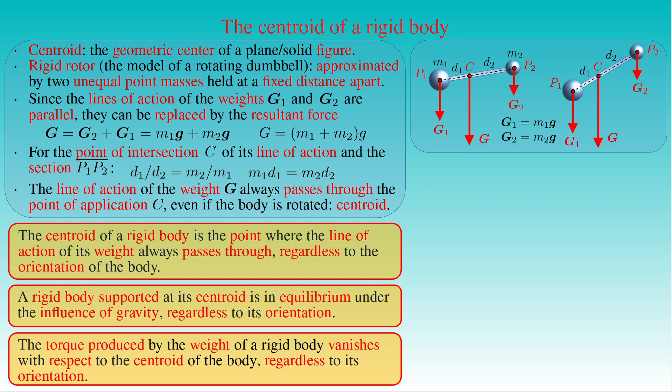In order to determine the centroid of a relatively small body, we can apply the method where we first suspend the body at a point P1 from a wire, then suspend it at another point P2. In both cases the body is in equilibrium, in which the vertical lines M1 and M2, called medians, passing through the point of suspension also pass through the centroid C of the body. Otherwise the torques produced by the weight G acting at point C with respect to P1 and P2 would not vanish, and the body would not be in equilibrium.

Then the centroid C of the body is the point of intersection of the medians M1 and M2, determined by suspending the body at its two different points P1 and P2.

In many cases we can determine the centroid of homogeneous bodies based on their symmetry properties. For example, in the case of a homogeneous thin rod, disk, annulus in a plane, or torus in space, sphere or cylinder, the centroid is the geometric center of the body. As the example of the annulus or torus shows, the centroid of the body is not necessarily located in the body. Generally, if a homogeneous body is symmetric about a plane, a line, or a point, then the centroid is in the symmetry plane, on the symmetry line, or at the symmetry point.

If the body has more than one symmetry plane or symmetry line, then the centroid lies on the line of intersection of these planes or at the point of intersection of these lines. For example, the centroid of a homogeneous triangle is the point of intersection of its three medians, connecting the vertices of the triangle to the midpoints of the opposite sides.

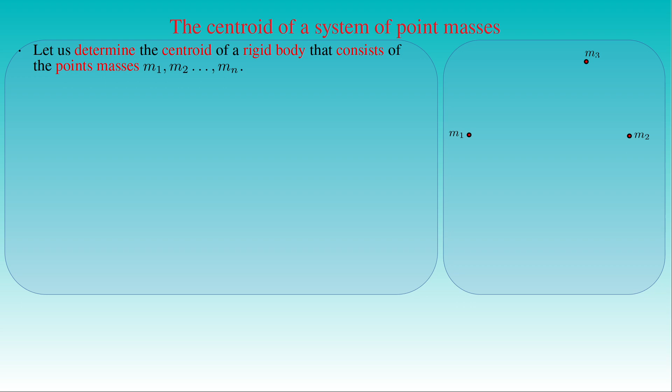We saw that the method used to determine the centroid of a rigid rotor can also be applied in the case of solid bodies. Now we generalize this method for rigid bodies of whatever shape, with no symmetry at all. Let us consider a rigid body that consists of point masses m1, m2, ellipsis, mn. For simplicity, we show only the first three point masses in this system and omit the rigid sticks holding them fixed distances apart. We can construct the centroid of this rigid system of point masses by repeating the method applied for the rigid rotor.

First we determine the centroid C sub 1,2 of the point masses m1 and m2, then we combine these point masses into the point mass m1 plus m2 at their centroid.

The position of the point C sub 1,2, lying on the line section connecting the point masses m1 and m2, is determined by the equation stating that the mass m1 times the distance d1 between the point mass m1 and the centroid

is equal to the mass m2 times the distance d2 between the point mass m2 and the centroid. In the second step we determine the centroid C sub 1,2,3 of the combined point mass and the point mass m3, and we combine them into the point mass m1 plus m2 plus m3 at the centroid C sub 1,2,3.

Then the equation determining the position of the centroid on the line section connecting the combined point mass m1 plus m2 at the point C sub 1,2 and the point mass m3 is the following.

The sum of the masses m1 and m2 times the distance d sub 1,2 between the point C sub 1,2 and the point C sub 1,2,3, is equal to the mass m3 times the distance d3 between the point mass m3 and the centroid C sub 1,2,3. We can continue this procedure for the rest of the rigid system of point masses, and determine the centroid of the whole system.

For a given reference point O, the set of position vectors R1, R2, ellipsis, Rn describe the positions of the point masses in the system.

Let R sub 1,2 denote the position vector of the centroid C sub 1,2, where the lengths of the vectors R sub 1,2 minus R1 and R2 minus R sub 1,2 give the distances d1 and d2 respectively.

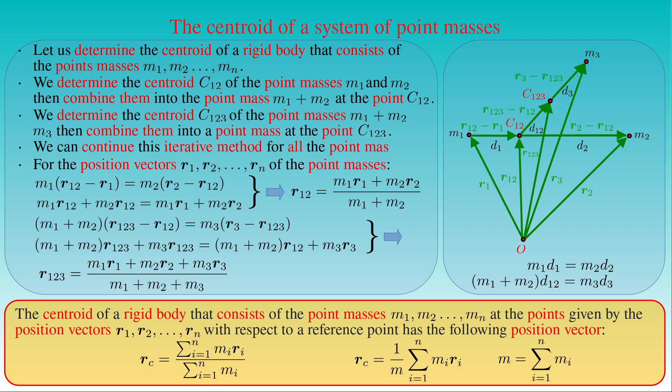In order to provide a quantitative description of the position of the centroid of a system of point masses, we introduce a Cartesian coordinate system having its origin at the reference point O, and represent the position vector Ri of any point mass mi by the Cartesian coordinates xi, yi, and zi. The coordinate expansion of the vector equation describing the position vector Rc of the centroid C gives three component equations. The x-coordinate of the centroid equals 1 over the total mass m of the system, times the sum of mi times xi from i equals 1 to n. We have similar equations for the y and z components of the centroid as well.

The vector and component equations define the centroid of a system of point masses even if the point masses have no rigid connections with each other. Although the three component equations of the centroid depend on the coordinates of the point masses, it is evident from the iterative construction method, without using any reference point and coordinate system, that the position of the centroid of the system with respect to the system itself is independent of the choice of coordinate system.

The position of the centroid of a system of point masses or a rigid body is completely determined by the distribution of mass in the system or over the volume of the body. In the general case when the distribution of mass is arbitrary, we call the centroid the center of mass of a system of point masses or a rigid body. The centroid is equivalent to the geometric center of a body, whereas its center of mass is defined by the equations obtained for the position vector Rc and its coordinates.

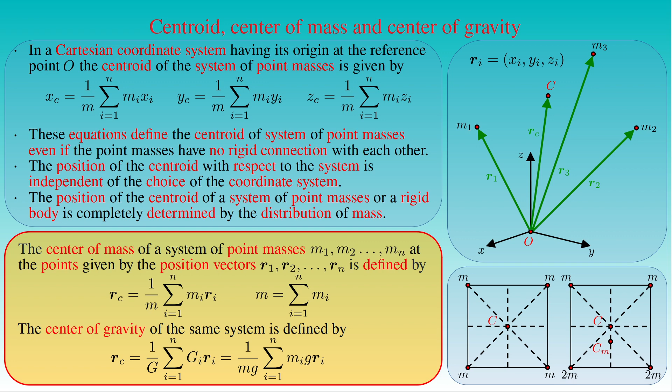As opposed to a system of individual point masses, ordinary bodies have a continuous distribution of mass which can be either homogeneous or inhomogeneous. In order to determine the center of mass Cm of a rigid body, we break up the body into n volume elements delta Vi, where Ri denotes the position vector of the volume element delta Vi with respect to a reference point O. The mass element delta Mi is equal to the mass of the matter in the volume element of the body with a continuous distribution of mass.

Then we can apply the formula derived for a system of point masses and approximate the center of mass Rc of the body with the sum of the position vector Ri times the mass delta Mi, from i equals 1 to n, divided by the sum of delta Mi from i equals 1 to n.

Since the density ρI of the matter in volume element ΔVi is given by the ratio of ΔMi to ΔVi, we can express ΔMi as the product of ρI and ΔVi. The center of mass Rc of the body can therefore be approximated with the sum of ρI times Ri times ΔVi from I equals 1 to n, divided by the sum of ρI times ΔVi from I equals 1 to n. If ΔVi tends to 0 while the number n of volume elements approaches infinity, the limit of each sum in the fraction gives a volume integral over the volume of the body.

As a result, the position vector Rc of the center of mass of a rigid body that has a density ρ depending on the position vector r is given by the volume integral of the density ρ times the position vector r, with respect to the reference point O, over the volume integral of the density ρ.

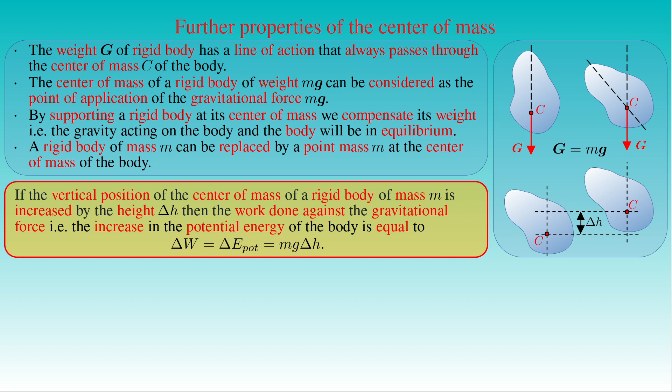If we suppose that the vertical position of the center of mass C of a rigid body is increased by the height delta h, we can express the work W done against the gravitational force, that is the increase in the potential energy of the body delta E_pot, as the mass m of the body times the magnitude of the gravitational acceleration times delta h.

We also saw that the torque due to the weight of a rigid body vanishes with respect to its centroid or center of mass and does not rotate the body. If the body is supported at its center of mass but is free to rotate, then we can determine the axis about which the rigid body will rotate under the influence of a force couple.

We already presented an experiment where a board is placed on 3 balls of the same size such that the balls rolling on the floor allow the board to move horizontally. If we apply the force couple F and minus F on the board at points P1 and P2, the board will rotate in the horizontal plane, and we can demonstrate that the vertical line passing through the center of mass of the board is the axis of rotation.

In general, a force couple applied on a free rigid body will rotate the body about an axis passing through the center of mass of the body, but the direction of the rotation depends on both the torque due to the force couple and the distribution of matter in the body.

Now we formulate the general criteria for the equilibrium of a rigid body.

We have already shown that a system of forces F1, F2, ..., Fn applied at the points given by the position vectors R1, R2, ..., Rn relative to an arbitrary point O of the body can always be reduced to 2 sets of quantities. The first set consists of a single vector, a resultant or net force F, given by the vector sum of the forces Fi from i equals 1 to n, applied at point O. The second set is a force couple producing the torque tau, given by the sum of the vector products of the position vectors Ri and the forces Fi, from i equals 1 to n.

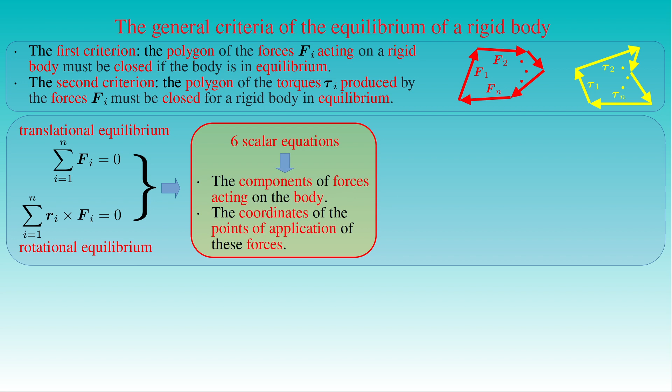The first three scalar equations describing the criterion of the translational equilibrium of a rigid body state that the sum of the x, y and z components of the forces Fi acting on the body, from i equals 1 to n, vanishes. The second set of scalar equations are the components of the equation describing the criterion of the rotational equilibrium of the body.

The x component of the vector equation states that the sum of the y coordinate of the point of application of the force Fi times the z component of the force Fi, minus the zi coordinate of the point of application of the force Fi times the y component of the force Fi, from i equals 1 to n, vanishes.

The other two equations for the y and z components of the vector equation can be derived by applying a cyclic permutation of the Cartesian indices x, y and z.

We already determined the criterion of equilibrium for a rigid body free to rotate about a fixed axis or a fixed point. In the case of a fixed axis, the equation describing the equilibrium of the body states that the sum of the z components of the torques tau I produced by the forces Fi acting on the body, from i equals 1 to n, is 0, where the z-axis is the axis of rotation.

This case involves only one equation, the z component of the second vector equation.

In the case of the fixed point, the equation describing the equilibrium of the body states that the vector sum of the torques tau I produced by the forces Fi acting on the body, from i equals 1 to n, is 0. This is the vector equation describing the criterion of the rotational equilibrium of the body when no constrained forces are applied on the body, and it is given by the three component equations.

There is no contradiction between these two cases and the criteria presented here, since the remaining five equations for the first case, or three equations for the second one, allow us to determine the constraint or reaction forces when we fix the point or the axis of rotation.

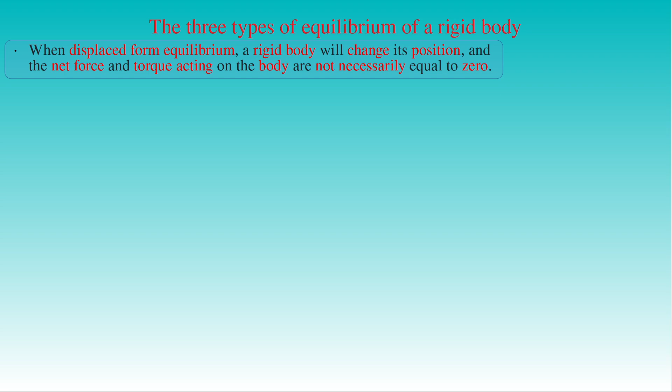Then the first type of equilibrium can be described as follows. If the body under the influence of the net force and torque returns to its original equilibrium position, generally after some small oscillation about it, then the rigid body is in stable equilibrium.

A typical example of such a situation is a ball at the bottom of a bowl. If the ball is displaced slightly, it will roll back to the bottom of the bowl, that is, it will return to its stable equilibrium position.

The second type of equilibrium describes a different outcome of the same initial situation. If the displaced rigid body does not return to its original equilibrium position, but moves away from it under the influence of the forces due to the displacement, then the body is in unstable equilibrium.

Using the example of the ball on the bowl, we can place the ball at the top of the inverted bowl. If the ball is balanced at the top, then it is in equilibrium. However, any slight displacement causes the ball to roll down from the top of the bowl, indicating that its equilibrium position is unstable.

The third type of equilibrium is perhaps the simplest one. If the displaced rigid body remains in its new position, then it is in neutral equilibrium. The ball lying on a flat surface is in a state of neutral equilibrium, since it will remain at rest even if it is slightly displaced.

Or it begins to move, settling in the new position if it is pushed slightly to roll. The new position of the ball is a neutral equilibrium position as well.

In principle, the equilibrium of a mechanical system is stable if the displacements in the system due to any sufficiently small interference also remain small.

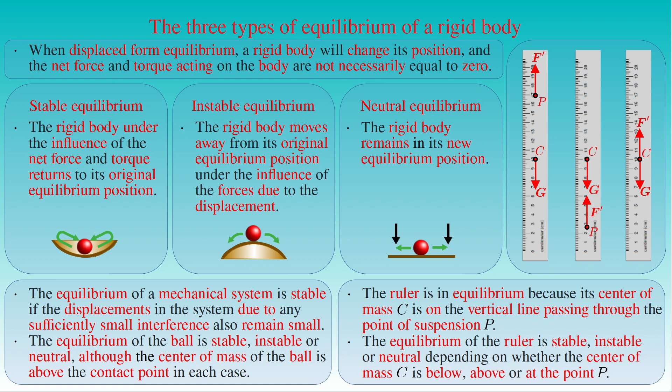The following criterion is still valid for both examples. By supposing that the unconstrained force acting on a rigid body is only its own weight, we can state that the body is either in stable or unstable equilibrium if its center of mass is in the lowest or highest possible height.

As a result of a small displacement from the stable equilibrium, the center of mass of a rigid body rises and a positive work Wg is done against the gravitational force, which increases the potential energy Epot of the body. At a stable equilibrium position, the body has therefore less potential energy than at any neighboring position occupied by the body after a small displacement.

The opposite is true for the unstable equilibrium of a rigid body, where the center of mass is lowered due to a small displacement of the body from its equilibrium position. Then the work done against gravity is negative, and so is the change in potential energy, indicating that the potential energy of the body is greater at its unstable equilibrium position than at any neighboring position.

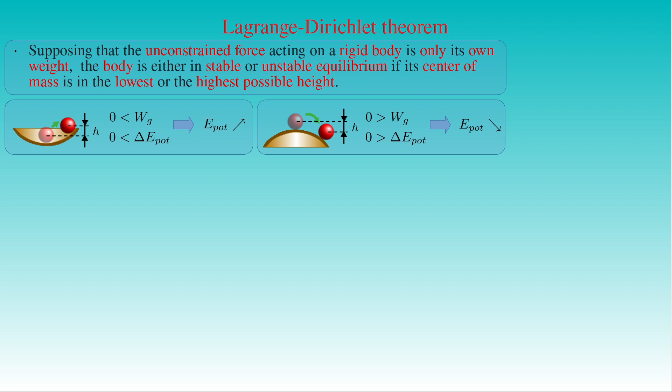In this form, the criterion can be generalized as a theorem which was stated by Lagrange in 1788 and proved by Dirichlet in 1846. The Lagrange-Dirichlet theorem states that the equilibrium position of a conservative mechanical system is stable if its potential energy assumes a local minimum in this position.

In fact, the theorem only provides a sufficient but not necessary condition for stable equilibrium of a rigid body, that is, one can construct a conservative mechanical system where the potential energy has no local minimum in stable equilibrium. However, the converse of the theorem also holds for the examples from everyday life discussed here.

By applying the example of the ball and the bowl, we can illustrate the theorem for the potential energy Epot of the ball as a function of its position rolling in the bowl. If we choose the bottom of the bowl as the reference level for the potential energy of the ball, then Epot is equal to 0 in equilibrium.

For any displacement, the center of mass of the ball reaches a position where its height is greater than 0. Since the potential energy of the body is directly proportional to the height of the position of its center of mass, Epot is greater than 0 everywhere in the vicinity of the equilibrium position. As a result, the potential energy of the ball has a local minimum at the equilibrium position, which means it has a stable equilibrium there.

If the ball is balanced on top of the upside-down bowl, the potential energy Epot of the ball has a maximum at the top of the bowl because the height of the position of its center of mass attains the maximum. For any small displacement of the ball rolling over the bowl, the center of mass of the ball approaches the reference level.

As a result, the potential energy of the ball is less than the maximum attained on top of the bowl, and the ball has an unstable equilibrium there.

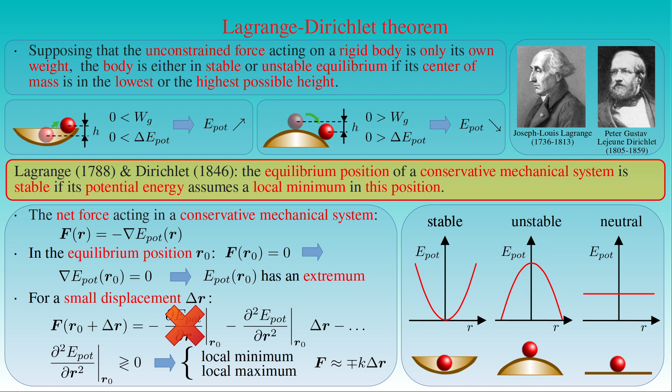In this result, we immediately recognize the law of force introduced in the discussion on simple harmonic motion. In the case of the local minimum of the potential energy, the force F is approximately equal to minus k times the displacement delta R, which is Hooke's law, stating that the force is a linear restoring force accelerating the body in the direction opposite to the displacement and towards the equilibrium position.

Since the length of the displacement vector delta R is small, the displaced rigid body undergoes a small harmonic oscillation about its equilibrium position. Normally, in realistic mechanical systems, frictional or drag forces are also exerted on the oscillating body near equilibrium, and the body will dissipate its energy.

Due to the loss of energy, oscillating systems have a decreasing amplitude in time, that is, the body performs a damped oscillation and eventually comes to rest at the equilibrium point. This behavior shows that the equilibrium of the body is stable if its potential energy has a local minimum at the equilibrium point.

In the case of the local maximum of the potential energy, the force F is approximately equal to k times the displacement delta R, which is the other form of Hooke's law, stating that the force F is a linear accelerating force, and it accelerates the displaced body away from the initial equilibrium position.

Then we talk about an unstable equilibrium if the potential energy of the body has a local maximum at the equilibrium point. We note that damped oscillating systems are not conservative and do not have potential energy associated with them. As a result, the equation of motion for damped oscillations must be derived from the fundamental equation of dynamics by applying Hooke's law.

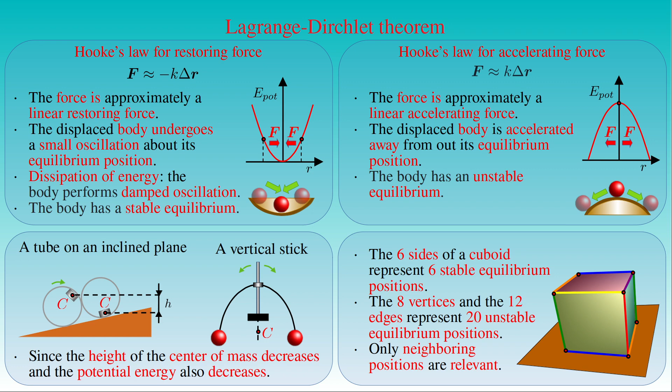So far we always considered the effect of gravity on rigid bodies in the discussion on their state of equilibrium. Now we present 2 examples illustrating the equilibrium of a physical system where the gravitational force is not relevant.

For a small displacement of the ball either in vertical or horizontal direction, the ball will return to its equilibrium position with or without a damped oscillation, due to the restoring forces applied on the ball by the springs as Hooke's law states. Then the state of the ping-pong ball between the stretched springs can be described as a stable equilibrium.

If we compress the springs, then both of them will push the ping-pong ball by exerting forces on it which are equal in magnitude and opposite in direction. In this case the resultant force also vanishes and the ball stays in equilibrium.

However, for any displacement of the ball in the vertical direction, the springs exert an accelerating force on the ping-pong ball and push it in the direction of the displacement. The state of equilibrium of the ball between the compressed springs is therefore unstable.

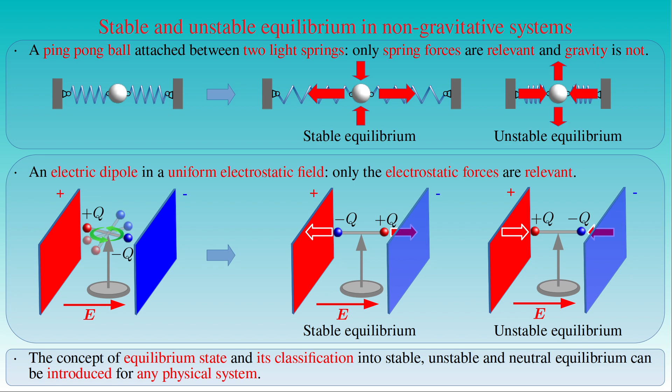These examples illustrate that the concept of equilibrium and its classification into stable, unstable and neutral equilibrium can be introduced for any physical system, whether gravitational, harmonic or electrostatic forces acting in the system. The state of equilibrium is also an important concept in thermodynamics or statistical mechanics. We have seen that the equilibrium of rigid bodies can be stable, unstable and neutral. However, we can also test how stable the state of equilibrium is and measure its stability with different quantities.

The measure of stability for such equilibrium states can be determined by the tipping or tilting test of the given rigid body. Its geometric measure with respect to the edge E is the tipping angle alpha, defined by the maximum angle through which a rigid body in a given state of stable equilibrium can be tilted without tipping over. Since the body reaches the state of unstable equilibrium closest to its original state of equilibrium at the tipping angle alpha, it is a critical angle where the center of mass C of the body is directly over the tipping edge E.

The energetic measure of the stable equilibrium of a rigid body is given by the work done while the body is tilted from its stable equilibrium position about the tipping edge E through the tipping angle alpha. If the increase in the height of the center of mass C is equal to delta H, then the work W done against gravity is given by the mass m of the body, times the magnitude of the gravitational acceleration g, times delta H. The dynamic measure of the stable equilibrium of a rigid body is given by the minimum force F acting at the center of mass C, with a vertical line of action, that is needed to tip the body over the edge E.

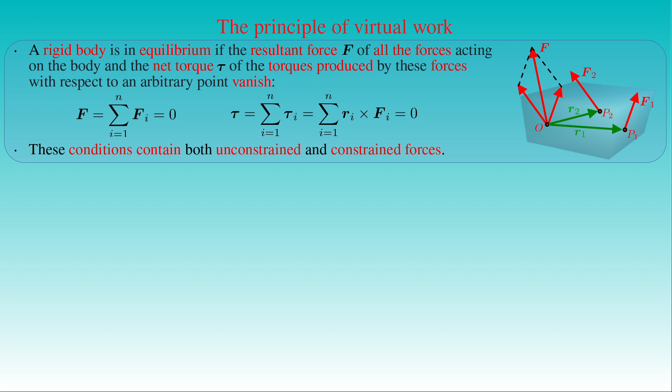It is especially true in the case of systems that consist of several parts, like engines or various machines. Since the condition of equilibrium must be applied for each element of a complex system, it is crucial to find a principle of mechanics free from constrained forces, reducing the complexity of the problems related to the equilibrium of such systems.

The infinitesimal work done along the infinitesimal displacement delta R is called virtual work and is denoted by delta W. In the case of the mathematical pendulum, any virtual displacement can either be perpendicular to the thread, as the displacements delta R1 and delta R2, or reduce the stress in the thread to zero, as the displacement delta R3.

Here the unconstrained force F acting on the bob is its own weight, given by the mass m of the bob and the gravitational acceleration g, whereas the constrained force F' is exerted on the bob by the thread.

When we studied constrained mechanical systems, we saw that the work done by constrained forces is always equal to zero because the line of action of these forces is perpendicular to the displacement of the body. In this example, the constrained force F' points from the bob towards the suspension point of the pendulum along the thread, and so it is perpendicular to the displacements delta r1 and delta r2.

In the case of the displacement delta r3, the thread is free from stress and there is no constrained force acting on the bob. Therefore, the virtual work done along the virtual displacements delta r1, delta r2, and delta r3 from the point P by the unconstrained force F is positive, 0, and negative, respectively.

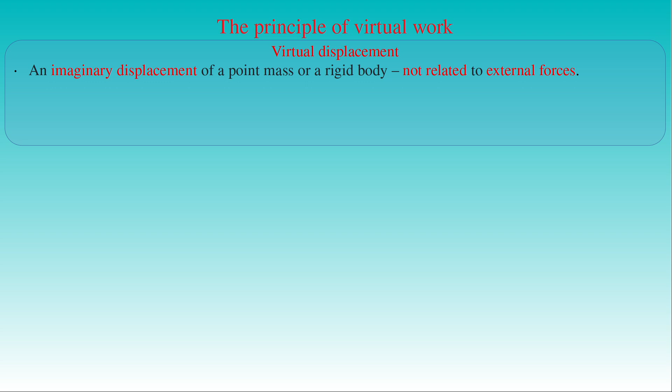A real displacement would require finite time during which a point-like or rigid body might move and forces applied on it might change. By contrast, the virtual displacement of a body is a small instantaneous change in the coordinates describing the configuration of the body. It therefore occurs without the passage of time and is defined as any small displacement consistent with the constraints imposed on the motion of the body.

The imaginary displacement is only assumed to exist so that various possible equilibrium positions of the body may be compared to determine the correct one. By definition, a virtual displacement conforms to the instantaneous constraints, and hence its direction is always perpendicular to the constrained forces exerted on the body.

As the second example shows, virtual displacements involve not only small translations of a body but also its rotation through a small angle about a given point or axis. The instantaneous displacement of a point of a rotating body is perpendicular to the line connecting the point and the point or the axis of rotation, which is the line of application of the constrained forces fixing the point or the axis of rotation. As a result, any displacement due to a rotation is also perpendicular to the direction of the constrained forces.

Although a virtual displacement, being only an imaginary and instantaneous displacement of the body, is not related to any external force, we can still assume that a force is exerted on the displaced body. We therefore introduce the concept of virtual work, defined as the work done on the body by a force along its virtual displacement. If the force F is applied on a rigid body, then the virtual work delta W done on the body by the force along the virtual displacement delta R of the body is given by the dot product of the force F and the displacement vector delta R.

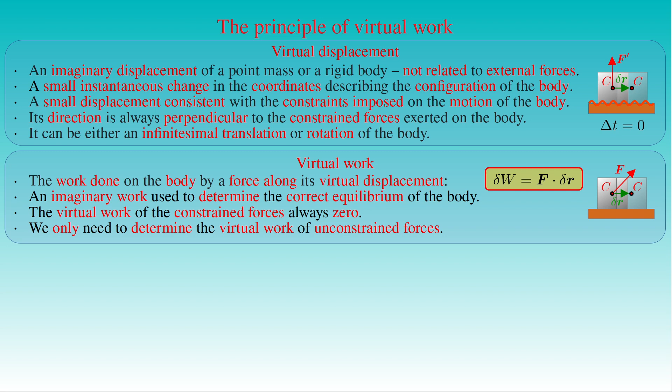After clarifying the concept of virtual work, we can draw a conclusion from these two examples which prove to be a general condition for equilibrium. This condition is known as the principle of virtual work, formulated by Johannes Bernoulli in 1717. The principle states that a mechanical system is in equilibrium if and only if the resultant work done by the unconstrained forces acting on the system along any virtual displacement of the system is equal to or less than zero.

The principle of virtual work is one of the most insightful findings in mechanics, leading to the discovery of the law of the conservation of energy. We can interpret this principle as follows. Unconstrained forces generally do positive work, and if it is not possible to do positive work by such forces starting from a given initial state of a body or a system of bodies, then the body or the system stays at rest.

The mathematical formulation of the principle of virtual work is the following. If the unconstrained forces F1, F2, ellipsis, Fn are applied on a system at the points P1, P2, ellipsis, Pn, and delta R1, delta R2, ellipsis, delta Rn are arbitrary virtual displacements of the points of application of the forces, then the virtual work delta Wi done by the force Fi along the virtual displacement delta Ri of the points of application can be written as the dot product of Fi and delta Ri for i running from 1 to n.

Since the net virtual work delta W done on the system is the sum of delta Wi for i equals 1 to n, the principle of virtual work can be expressed as the inequality stating that the sum of the dot product of Fi and delta Ri for i equals 1 to n, is equal to or less than 0.

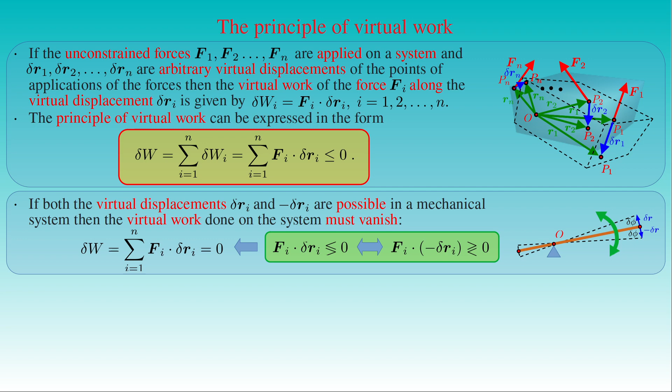We note that D'Alembert's principle can be rephrased in a mathematical form similar to the principle of virtual work. We already saw that according to D'Alembert's principle, the fundamental equation of dynamics describes the balance of the forces applied on a body and the inertial force F star, given by minus the mass m of the body times the second-order time derivative of the position vector r of the body. That is, the vector sum of the forces Fi exerted on the body from I equals 1 to n, plus the inertial force F star, vanishes.

Then the virtual work done by the unconstrained forces Fi and the inertial force F star along the virtual displacement delta r of a body can be written as the dot product of the vector sum of the forces Fi from I equals 1 to n plus the inertial force F star, and the virtual displacement delta r, which is equal to 0. As a result, D'Alembert's principle states that the product of the vector sum of the unconstrained forces Fi from I equals 1 to n minus the mass m times the second-order derivative of the position vector r with respect to time, and the virtual displacement delta r, vanishes.

In this formulation of the principle we only need to consider the unconstrained forces acting on the body, because no work is done by the constrained forces along the virtual displacement delta r.

Now we present the basic mechanical devices called simple machines, which are used to do work with reduced effort and energy through a mechanical advantage. We start with a more general classification of mechanical devices by dividing them into two groups.

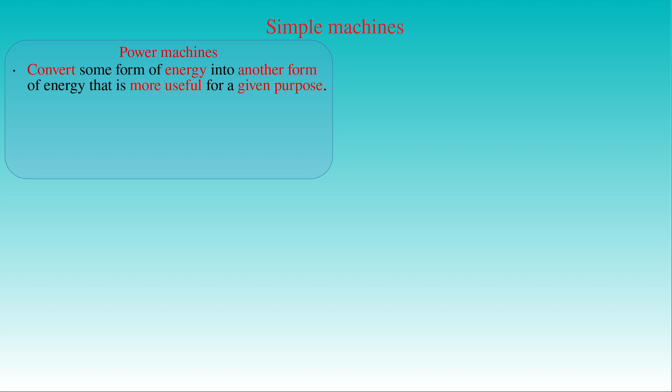Power machines or prime movers convert some form of energy into another form of energy that is more useful for a given purpose. Power machines are, for example, hydraulic motors converting hydraulic pressure into mechanical energy, steam engines converting heat into mechanical energy, dynamos converting mechanical energy into electric energy, generators also converting mechanical energy into electric energy, or electric motors converting electric energy into mechanical energy.

The counterpart of power machines are working machines, designed to perform useful work while consuming energy provided by power machines or simply muscle force. Typical examples of working machines are machine tools designed to form or cut parts made of metal or other rigid materials, cranes used to lift heavy objects or move them horizontally, bicycles which are pedal or motor powered, two-wheeled steerable single-track vehicles, or sewing machines used to stitch materials with thread and powered by treadle or electricity. Working machines have several basic types called simple machines, which are essentially the building blocks of more complex machines.

As their name shows, simple machines are mechanical devices with few or no moving parts. They are used to alter the direction and the magnitude of forces applied on them, functioning as force multipliers to do work. As a result, they reduce the effort and energy consumption through a mechanical advantage.

Simple machines can be divided into two groups as well. Lever-like machines belong to the first group, whereas the second group consists of machines using inclined planes. Lever-like machines are lever, wheel and axle, and pulley, each of them used to reduce the amount of force needed to lift or lower a load.

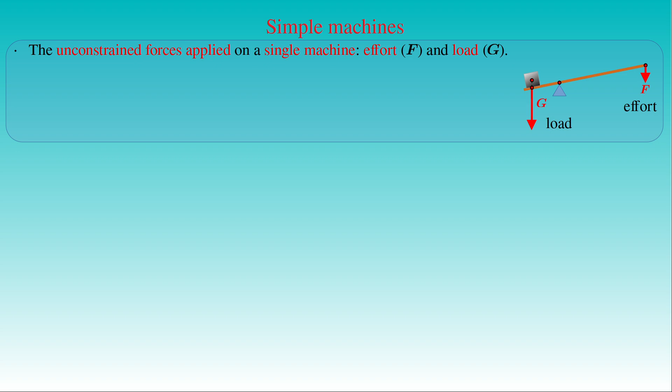If we neglect the friction between the parts of a simple machine or the elasticity of the parts, that is, we consider them rigid bodies, then we talk about ideal machines. We will determine when ideal machines are in equilibrium under the simultaneous influence of the effort and the load.

The force somewhat greater than the effort corresponding to the equilibrium of the ideal machine is already enough to do the work with the machine, for example to lift a load. However, in practice we often need much greater force to do work due to the friction neglected in the case of ideal machines. Before determining the equilibrium conditions for ideal machines, we will examine some general properties of these machines.

If the muscle force F1 is applied on a lever to lift a body without acceleration, then the body of weight G is directly lifted by the force F2 equal to minus the weight G of the body. The effort F2 exerted on the body by the lever is enough to overcome the load G. In this sense, we can talk about transferring force from one body to another, here from the lever to the body placed on the beam of the lever, that is, simple machines are used for transferring force.

The magnitude and direction of the input force F1 applied on the machine can be different from those of the output force F2. The practical use of simple machines, already recognized in ancient times, is just that a force can be used to overcome a greater load with their help.

However, according to the law of conservation of energy, the work done by the output force F2 cannot be greater than the work done by the input force F1 in the same time. In other words, the useful work W2 done by the machine cannot be greater than the work W1 done on the machine by the effort. Simple machines can reduce the effort required to do the work but cannot change the work done. In order to do the same amount of work, we need to apply a smaller force over a longer distance.

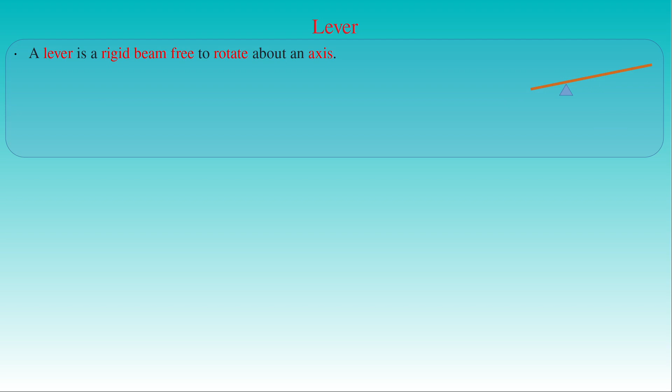Let us start the discussion on lever-type machines with the lever itself. A lever is simply a rigid beam that is free to rotate about an axis. Specifically, a lever transmits and modifies force or motion when forces are applied at two points of its beam, and it turns about a third point, the fulcrum.

It is used to exert a pressure or sustain a load G at one point of the beam by the application of a force or effort F at a second point, turning about its axis of rotation on a fulcrum. We consider such levers where the unconstrained forces applied on the beam are only the effort F and the load G, acting in the plane or planes perpendicular to the axis of rotation.

Based on the positions of the lines of action of the effort F and the load G relative to the fulcrum, we distinguish three orders or classes of levers. A lever that has the fulcrum O between the lines of action of the load G and the effort F, as seen in the example, is known as a first order or first class lever.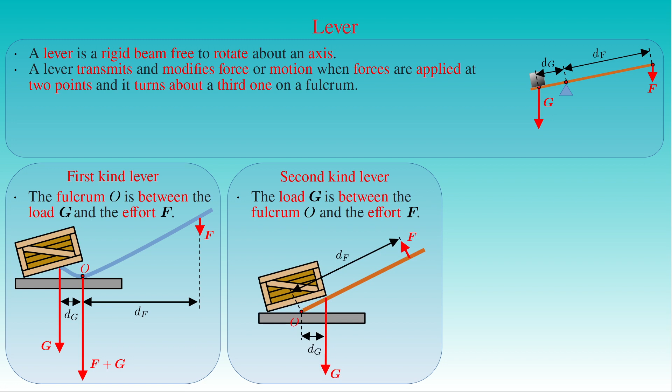We have already determined the general condition of the balance of a system of forces acting on a rigid body. We demonstrated that the rigid body is in equilibrium if the vector sum of the torques produced by the forces with respect to an axis of rotation vanishes.

A special case of this condition, with two forces acting on a beam free to rotate, was formulated by the lever principle. By applying the lever principle for all three classes of levers, we can state that the magnitude of the effort F times the lever arm dF of the force F is equal to the magnitude of the load G times the lever arm dG, or the ratio of G to F is equal to the ratio of dF to dG.

This ratio, that is the ratio of the magnitude of the load or output force produced by the lever to the magnitude of the effort or input force applied on the lever, is called the mechanical advantage of the lever, or generally the mechanical advantage of any simple machine. The lever principle shows that levers convert a small force applied over a long distance to a large force applied over a small distance.

In the example illustrating second-order levers, the axis O of rotation is fixed, that is, the fulcrum is always at the end of the beam on the ground. In the case of the first-order lever shown here, the position of the axis of rotation changes along the curved crowbar with rising or lowering the right end of the crowbar. However, we can always replace the instantaneous axis of rotation with a fixed imaginary axis at a given instant of time, and determine the condition of equilibrium of the lever.

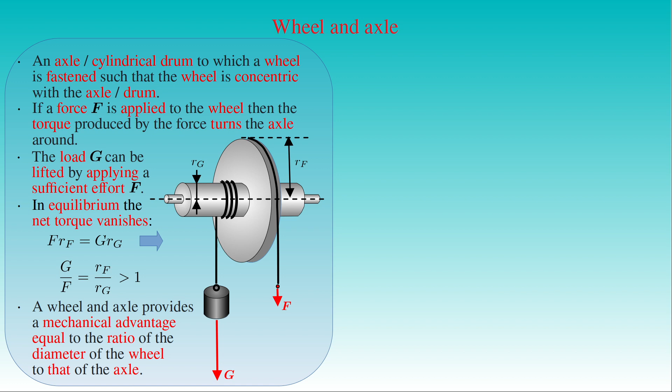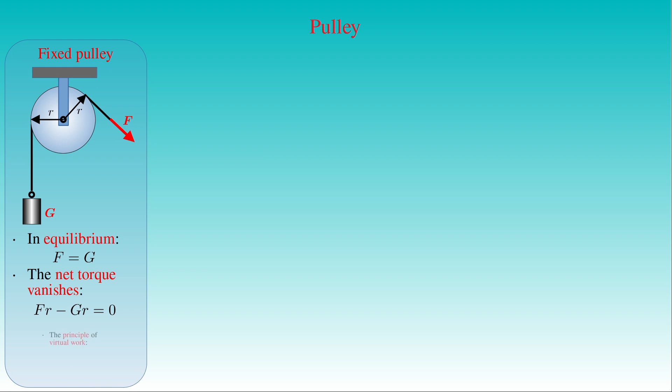We can also obtain this result by applying the principle of virtual work. For a displacement delta S of the end of the rope in the direction of force F, the height of the load G is increased by delta S, since the rope cannot be stretched. The virtual work is then the magnitude of F times delta S, minus the magnitude of G times delta S, which must vanish. This also gives the equality of the magnitudes of F and G.

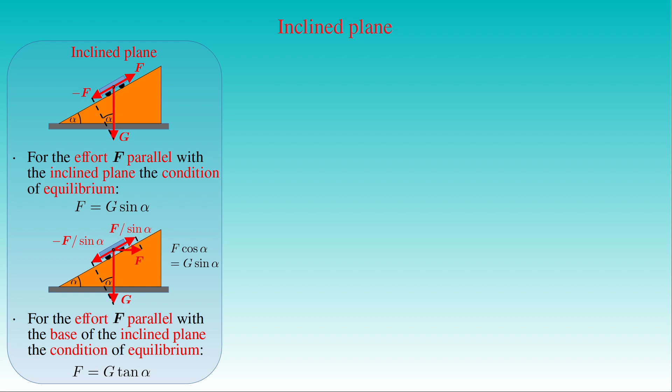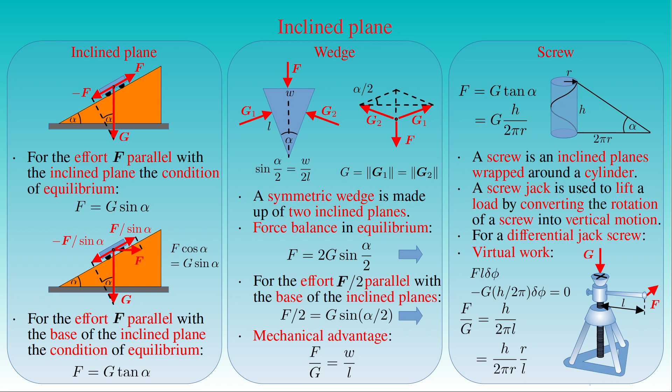In the discussion on static measurement of mass we mentioned weighing scales. Now we present the measuring instruments of mass and weight in more detail. While scales and balances are both used as weighing devices, their intended purposes slightly vary. Scale measures weight whereas a balance measures mass.

However, many balances are now used like scales to measure the weight of an object. Based on their working principle, there are two main classes of weighing scales: mechanical and digital. Mechanical weighing scales operate using a system of springs or levers.

Spring scales and hanging scales measure weight based on the deformation of a spring due to the load. The weight of the object causes the spring to compress or stretch, and this deformation is measured to determine the weight. These scales are known for their mechanical simplicity but may lack precision.

Balance beam scales and trip scales are weighing instruments based on Archimedes' law of the lever, stating that a lever is in balance if the total torque acting on its left-hand side is equal to the total torque acting on its right-hand side. Analytical balances are extremely precise and are used to measure very small amounts of substances in labs.

Digital weighing scales or balances utilize electronic components and sensors for weight measurement. They convert the force exerted by the object into an electrical signal, which is then displayed as a weight reading on a digital screen. Electronic weighing instruments can be simple digital scales or hanging scales, but their most sophisticated versions...

...like analytical balances are used in laboratories. Digital analytical balances are generally more accurate and precise than their mechanical counterparts.

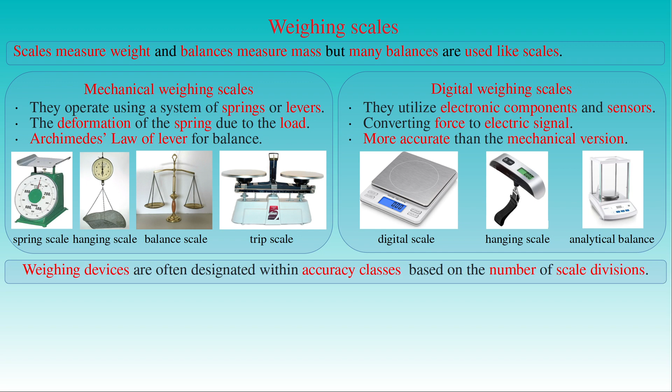Weighing devices used for commercial or laboratory use are often designated with accuracy classes based on the number of scale divisions. Scales in the first accuracy class are ideal for precision lab work, and have a minimum of 50,000 divisions. They display results in increments of 1 mg or better.

Semi-micro and analytical balances are often rated class first. In the second accuracy class, scales have up to 100,000 divisions. Typical uses of scales in this class include laboratory weighing, weighing of precious metals and gems, and grain test scales.

The third accuracy class can be divided into 3 categories: medium, large and ordinary. Scales in the medium category are designed for industrial or commercial use and have a maximum of 10,000 divisions. Scales in the large category are also used for commercial use, but offer a much larger capacity, with a maximum of 10,000 divisions as well. Ordinary scales in the third accuracy class are used to weigh heavy loads but have only up to 1,200 divisions.

Its main component is a central balance beam with a sharp steel knife edge attached to the beam. The axis of rotation of the beam is determined by the contact points of the knife edge and the top of the central pillar of the device on which the edge is balanced.

Two knife edges turned upside down are balanced on both ends of the central beam, where the axes of rotation of the knife edges can be adjusted by balancing screws. Each of the knife edges is connected to a hook and a stirrup.

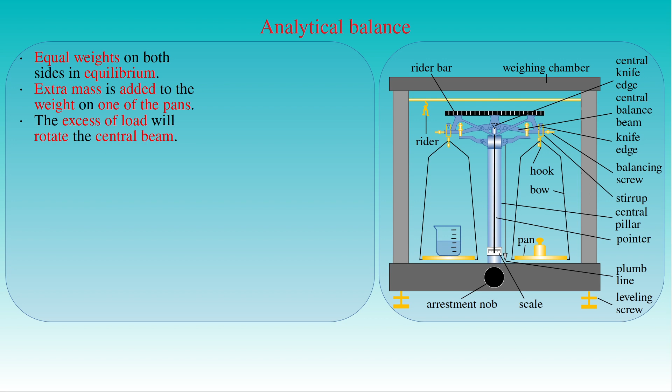The sensitivity of the balance can be described by the ratio of the angle of deflection of the pointer to the extra mass placed on the pan, or the ratio of the displacement of the pointer over the scale to the extra mass.

Let us suppose that the axes of rotation determined by the positions of the 3 knife edges lie in a plane, that is, the points of rotation O1, O and O2 lie on the same line, and the 2 arms of the balance have the same length L.

Let G0 and C denote the weight and the center of mass of the central beam and the pointer without the pans. The total weight of a pan and the body placed on each pan is denoted by G. For complete symmetry of this setup, the center of mass C must lie on the vertical line passing through the point of rotation O in a stable equilibrium, where the point O is above the point C with the distance d between them.

If extra mass is placed on the right pan producing the excess of weight delta G applied on the right-hand side arm of the balance, then the central beam with the pointer will rotate through an angle phi and reach a new equilibrium state. Since the lever principle tells us that the torques produced for both arms are balanced for any angle phi in equilibrium, the vector sum of the torques must vanish.

Then the balance equation tells us that the sum of these two expressions is equal to 0, and we can express tangent phi from this equation as the ratio of delta G times L to G0 times d.

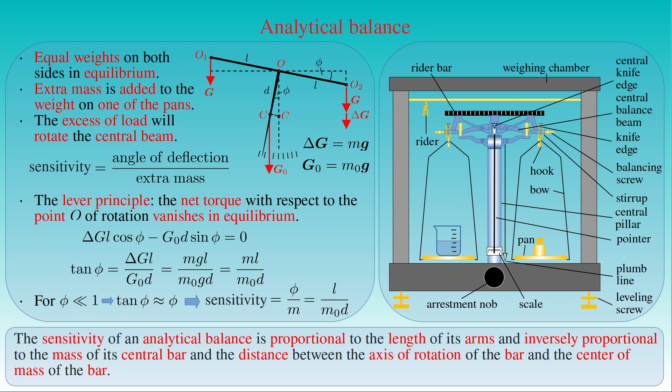Now we describe how to read an analytical balance. When the balance pans are arrested, we place the sample of unknown mass on one of the pans and the sum of the weights of the weight set of known mass on the other pan. After the pans are released, the balance performs oscillations about an equilibrium position determined by the loads on the pans, which has a small damping factor due to the small friction.

In order to reduce the measurement time and increase the precision of weighing, the equilibrium position is determined from the oscillation based on the theory of harmonic motion. The deflection of the pointer on the scale is read off at an arbitrary odd number of adjacent turning points after the pointer passed through the first 3 to 5 turning points.

Then we take the average of the values at the left and the right turning points separately, and take the average of these two averages. For example, if the values read off are x1, x2 and x3 for 3 adjacent turning points, then the result x of the measurement is given by 1/2 times the average of the first and the third values plus the second value, that is 1/2 times the sum of x1 and x3/2, plus x2.

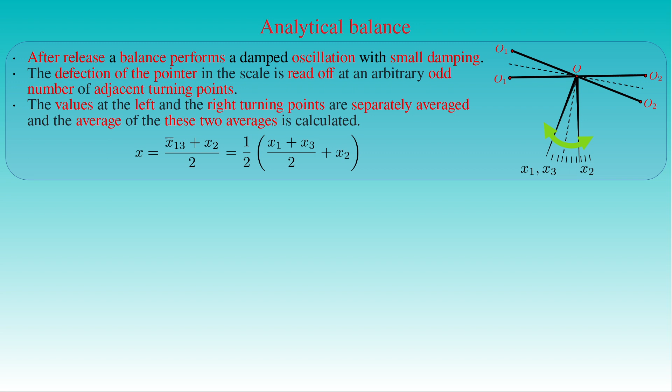We have seen that classical analytical balances are equal arm balances, where the torque produced by the weight of the sample on one side of the balance and the torque produced by an adjustable known weight on the other side cancel each other out in equilibrium.

Then we can determine the mass of the sample from the deflection of the pointer of the balance and the known weight used for the measurement.

Modern electronic laboratory balances operate on the principle of magnetic force restoration instead of the lever principle. The typical mechanism of such balances consists of an electromagnetic servomotor generating a force to counter the weight of a sample being measured. The main components of the servomotor are a permanent magnet producing a magnetic field and a coil supported by precision springs, which allows the coil to move in the direction of its axis.

Since the direction of the current flowing in the coil and the direction of the radial magnetic field are perpendicular at all points, an electromagnetic force is exerted on the coil in the direction of its axis. This force is also applied on the sample placed on the balance pan mechanically coupled to the servomotor.

An optical sensor detects the position of the coil and the sample, and provides a feedback or error signal to an electronic amplifier. When the weight of the sample and the electromagnetic force are balanced and the system is in equilibrium, the error detector is at the reference position or the null point. Then the average electric current in the servomotor coil is proportional to the electromagnetic force that is holding the sample with a given weight at the reference position.

When the load applied by the sample changes, the motion of the coil is detected by the optical sensor providing the error signal, and the amplifier automatically adjusts the current to maintain the position of the coil at a reference position. The direction and magnitude of this current change are such as to restore the equilibrium condition.

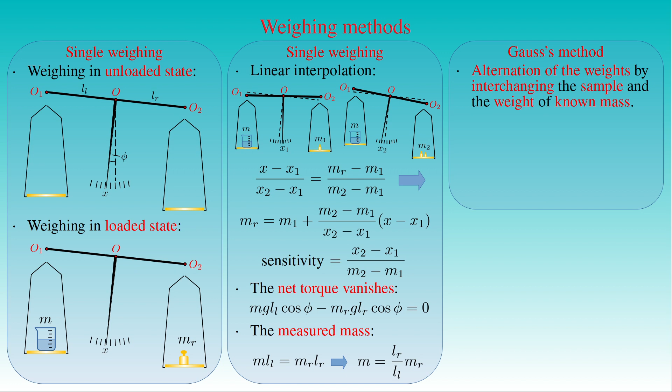That is, we interchange the role of the pans in the measurement by placing the sample onto the right pan and add weights of known mass to the left pan to restore the equilibrium state obtained in the first stage of weighing. Generally, the mass m sub L of the weights on the left pan used to restore the balance is not exactly the same as the mass m sub r used in the first stage. Here the mass m sub r is also obtained by linear interpolation as seen in the first stage.

Then we have two equations derived from the criterion of vanishing net torque in equilibrium for the two stages. For the first stage, the original equation states that the mass m of the sample times the length L sub L of the left lever arm is equal to the mass m sub r times the length L sub r of the right lever arm.

For the second stage we have the equation stating that the mass m times the length L sub r of the right lever arm is equal to the mass m sub L times the length L sub L of the left lever arm. If we multiply the first equation by the second one, we can write that m squared times L sub L times L sub r is equal to m sub r times m sub L times L sub r times L sub L. Then the mass m of the sample can be written as the square root of the product of the mass m sub r and the mass m sub L.

This is normally approximated as the average of the two masses. The lever arm ratio L sub L divided by L sub r can also be expressed from the ratio of the balance equations as the square root of the ratio of m sub r to m sub L.

The second type of double weighing is called Borda's method, where the first stage of weighing is followed by substitution of weights, that is by replacing the sample with weights of equal total weight. In the first stage, the sample of the unknown mass is placed in one of the pans, and balanced with fine shot or sand placed in the other.

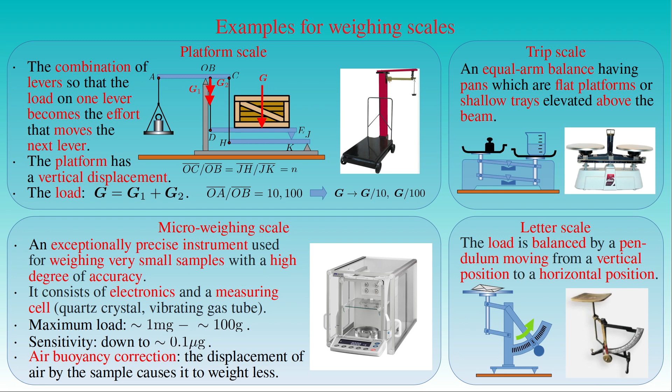Let us summarize the content of this presentation on the kinematics of rigid bodies.

We started with the basic definitions characterizing the position of rigid bodies and demonstrated that freely moving rigid bodies have 6 degrees of freedom. That is, the position of a rigid body can be described by 1 point and 3 angles of rotation for its orientation.

We demonstrated that the general motion of rigid bodies can be interpreted as a series of infinitesimal helical motions. In other words, an arbitrary infinitesimal displacement of a rigid body can be considered as a composition of an infinitesimal translation and an infinitesimal rotation about a given axis.

We also saw that special motions of rigid bodies, such as translation and rotation, can be conveniently described in coordinate representation, where the geometric transformations representing the displacement of the points of the moving body are given by translation vectors and rotation matrices. Since the effect of a force acting on a rigid body depends on its point of application,

we studied how forces acting on non-point-like bodies are able to change their state of motion. We formulated the principle of superposition of forces, stating that a system of n forces acting on a rigid body can be replaced by a single force and n force couples applied on the body.

We define the torque of a force acting on a rigid body with respect to a point of rotation by the cross product of the position vector of the point of application of the force, and the force.

Then we presented how to reduce a system of forces exerted on a rigid body to their net force and a force couple producing a torque equal to the net torque produced by the system of forces.

We define the centroid as the point of a homogeneous rigid body where the line of action of its weight always passes through. We generalize this concept to inhomogeneous bodies as the center of mass for rigid bodies, that is the average position of all the parts of the system or the body, weighted according to their masses.

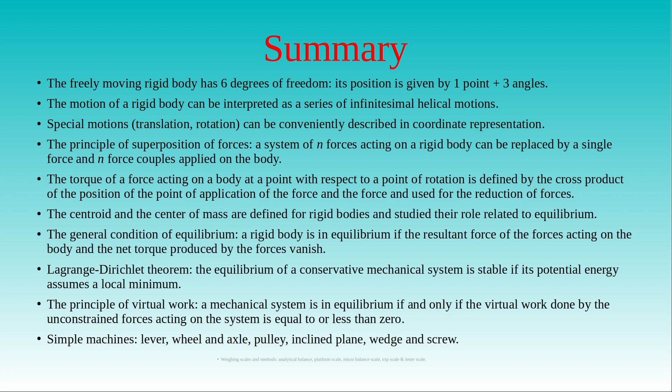Finally, we presented weighing scales mostly operating on the lever principle, such as analytical balances, described the measurement with balance scales, gave a brief account on the fundamental methods of single and double weighing, and listed some further examples like platform scales, micro-balance scales, trip scales and letter scales.